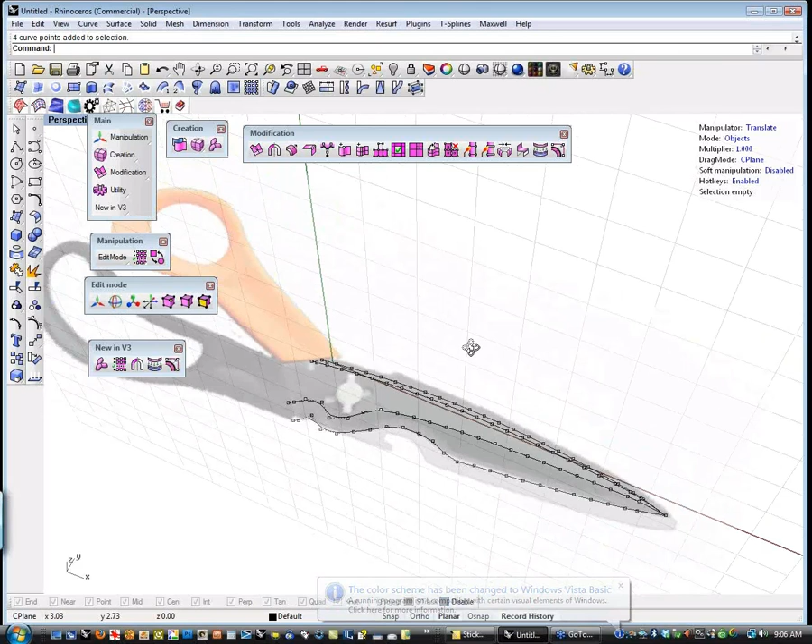Today I'm going to take a look at creating what could, with a traditional CAD system, be a fairly complicated model to make. It's a pair of sewing scissors.

Primarily I'm going to focus on the handles because that's where most of the organic stuff is going on. If we have some time at the end, I'll go into looking at the blades. I think we're going to try and pull this in right under an hour, Matt, so I'll keep an eye on the clock.

But I want to focus on the handles because I want to show you what I consider to be a really drop-dead simple workflow for creating stuff like this, that if you are a beginner just getting into 3D modeling for the first time, or if you're an experienced NURBS modeler getting into T-Splines, there's a little bit of a learning curve as far as the workflow and how to think about and plan a model like this.

There's a couple of interesting things in this model. The shape of these handles is, first of all, a very organic shape, continually blending. You'll notice there's a little area here that kind of rolls into this Y branch that then connects. Then we have a sharp edge down here, and the same thing around here. There's a little dip, and then a sharp edge around this, and then a little dimple sticking out here to keep the scissors from closing down on your palm.

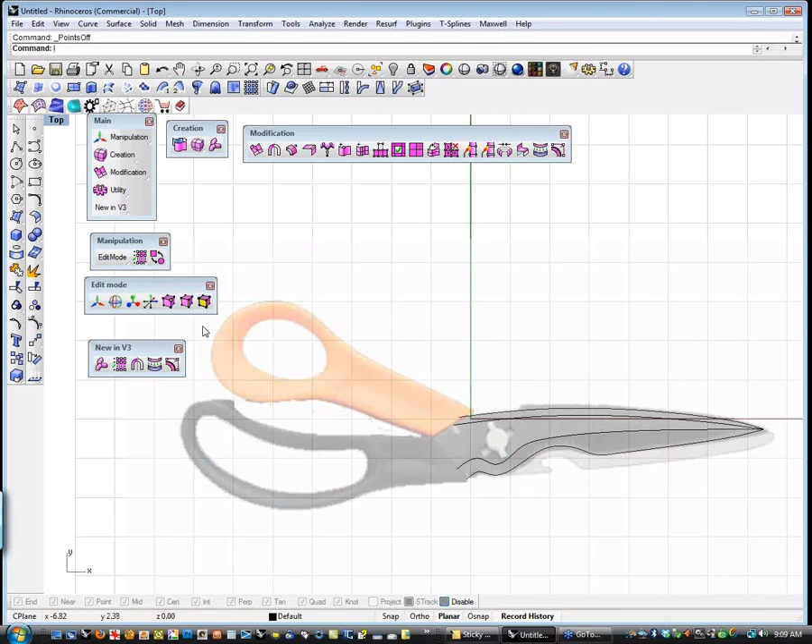But let's talk a little bit about how this model is going to lay out and the workflow behind it. Basically, I'm going to focus on the orange part right now and think about how this lays out, looking at the center line right through here. I want to have a little bit of detail over here and over here, and then I want this model to split apart and come around and join here, and split apart and come around and join here. So as I'm laying out my faces, I'm going to keep that in mind so I've got some options for adding this dent detail in here and how that wraps together.

If you've seen any of the other workflows or tutorials I've done, I've been calling this the append face workflow, and it's one of my favorite ways to work because it's absolutely positively dumb simple, with really powerful results, and it gets you up and flying without having to really know too much about the software. For me, when I evaluate a piece of software, I'm always like, how much can I do before I open the manual and start getting into this? With this workflow, you could start doing some really pretty awesome stuff really quickly with only about 3 or 4 tools.

Before we jump into that, I just want to go over the heads-up display and how the interface works and all that kind of stuff really quickly.

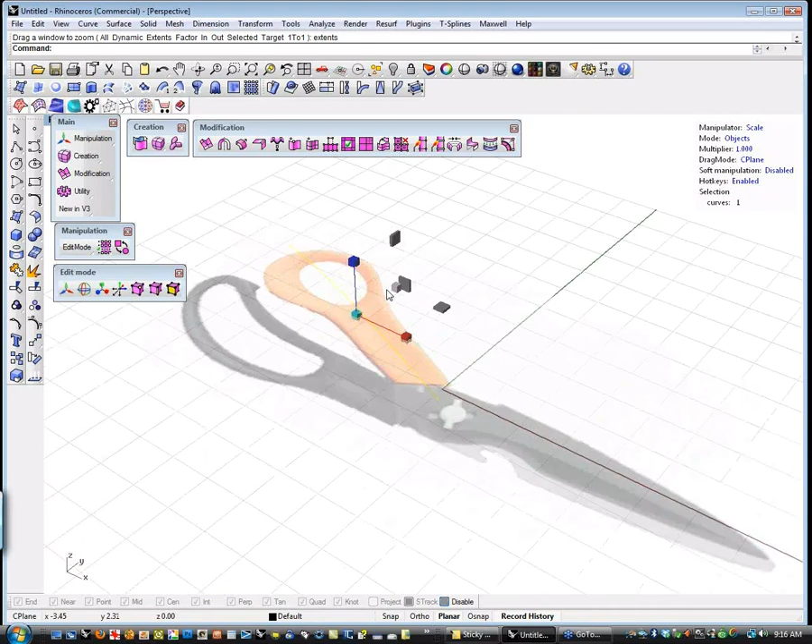You'll notice I have a 3D triad manipulator here, and I can pick which axis I'm manipulating, or I can manipulate in 2D just on the construction plane, or in 3D by grabbing the base icon there. One more click hides the manipulator.

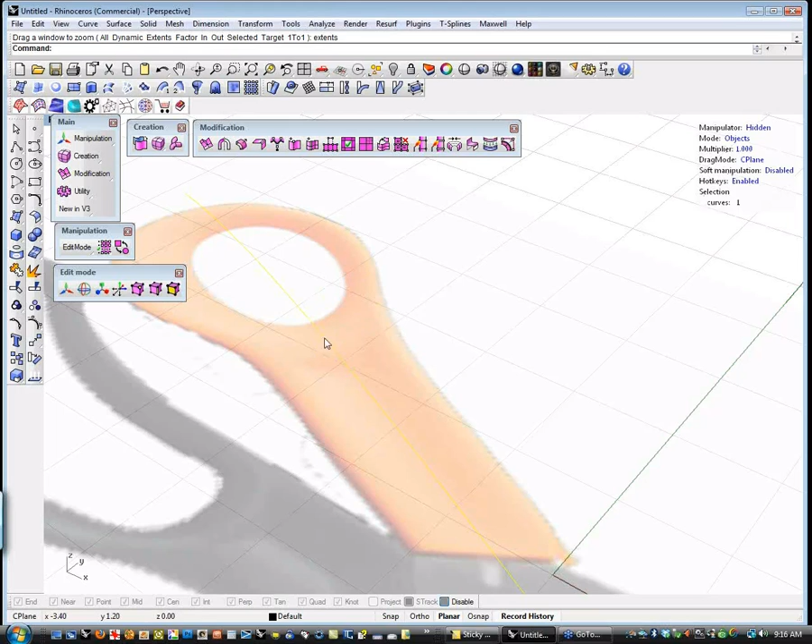Sometimes it's nice to get it out of the way if you don't want to deal with it, especially if you need to deal with something with a pointer or a selection. There are hotkeys for that.

If you look at your keyboard in the upper left-hand corner, you'll notice the Q, W, E, R, and T keys. Those are the hotkeys for translating through this. The Q hides it, the W gives you translate, the E gives you rotate, the R gives you scale, and the T key allows you to move the manipulator.

You'll notice when I hit the T key, the manipulator disappears and says pick a point. I'm going to move it down here, and that allows me to change where my manipulator is in the modeling window. Particularly effective for scaling and rotating.

Underneath that, we have the mode, and you can pick objects, verts, edges, or faces, just wanted to demonstrate how to access the different aspects of your T-Splines model. Those are also hotkey accessible by hitting A, S, D, or F keys - A being verts, S being edges, D being faces, and F being objects.

Underneath it, you'll notice there's a multiplier. What this does is adjust the feedback rate between the manipulator and the object.

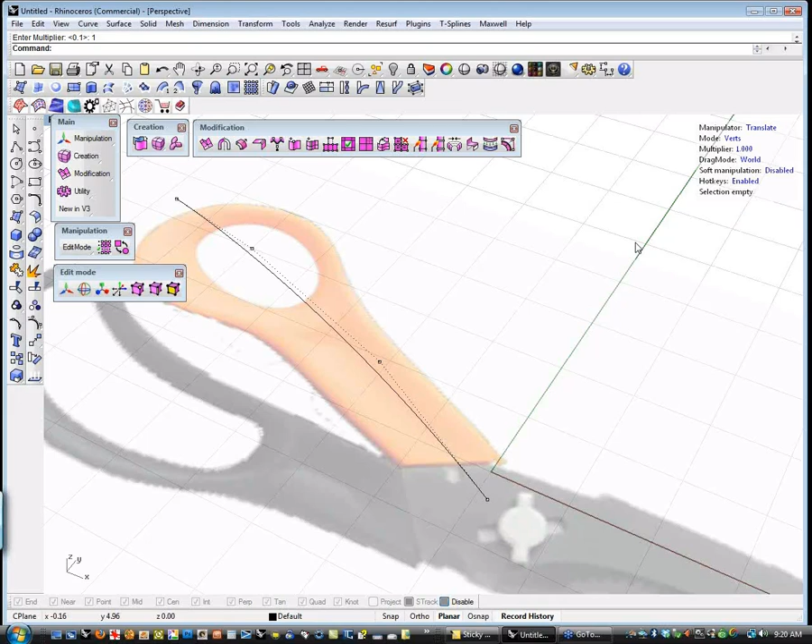So that's a little bit about the heads-up display, and that's primarily where most of your interface is going to come from when dealing with T-Splines, because there's a lot of make stuff and move stuff in this workflow. It's much more about picking a control point and moving it around, or picking an edge and moving it around, than a typical NURBS workflow where you're making an object, trimming a hole in it, building something off of it, and filleting it. This is a much more clay-like workflow.

So let's jump into this append face workflow, and let's look at how this works and what it does.

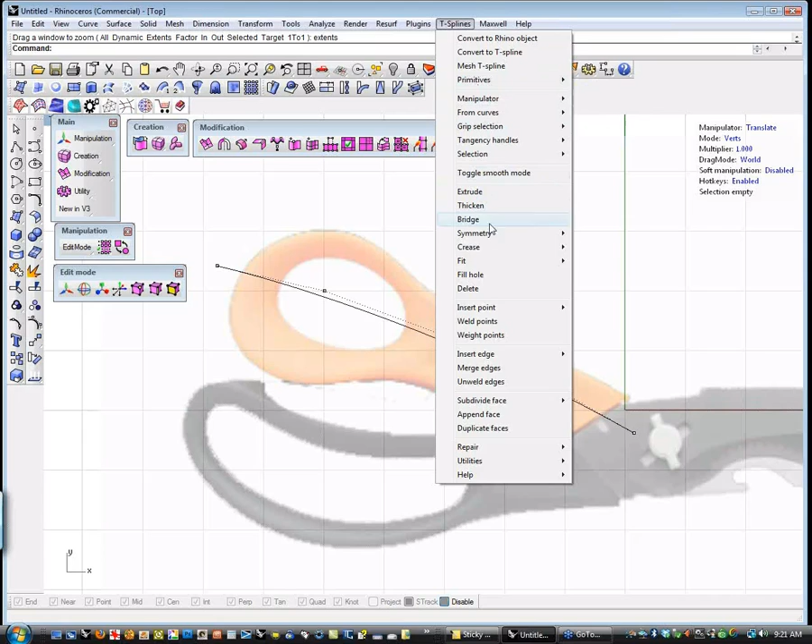What I'm going to do is start by making a single face using the append face tool, which is here, or in the... I never use these, here it is, down here. Basically it says point number 1, and I'm just going to make 4 points, dropping them in roughly where I want, respecting my center line. You'll notice that it made a face.

I can pick these edges, I can pick these verts since I'm in vert mode, and move it around to get basically what I want.

Then I'm going to go to edge mode, pick an edge, and hold down the Alt key. When I hold down Alt, it allows me to extrude an edge and make another face. The reason I want to do that is because I'm going to make a bunch of little patches and basically create this flat like a paper doll, then add some thickness to it and manipulate it to get my shape. So I'm going to hold down Alt over the C-plane manipulate icon here and drag out another face, and you'll notice it kind of updates as I go.

I'm just going to pull something in here, and pull another one up here.

Now I have to figure out how I'm going to get around this. I think I'm going to change into verts mode, grab a vert, and move this vert up here so that it's starting to turn the corner like that.

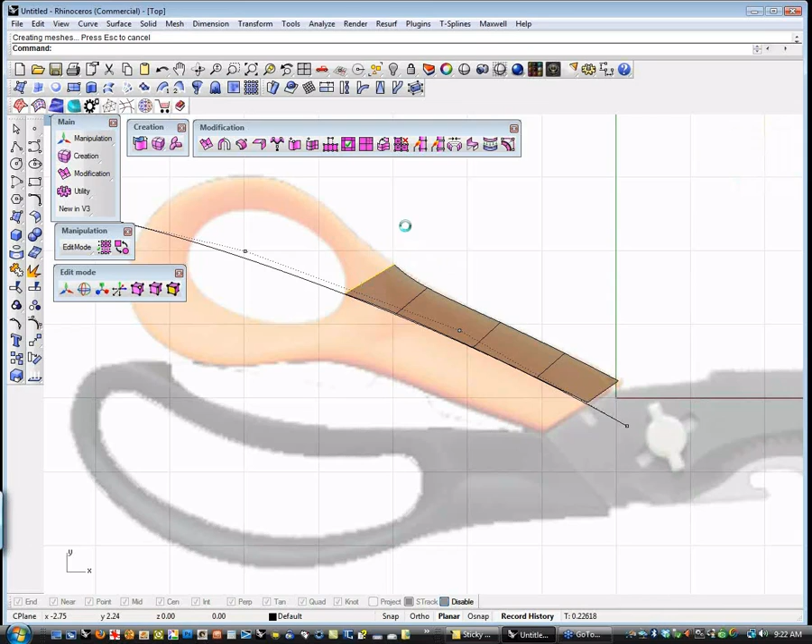I'm going to go back to edge mode and start pulling some more out of here. I'm not going to worry a lot about how this stuff is scaling or lining up right now, because it's all going to come together as I go. But I want to pay a little attention to how my flow layout is going, and you'll notice as I pull this next one up...

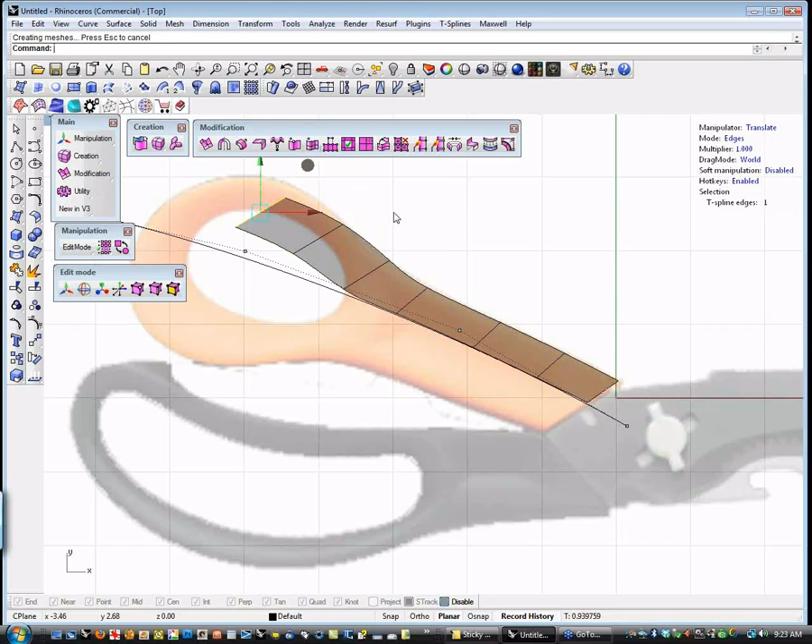Scoot down here a little bit. As I pull this next one up, I need to start going around the corner. So I'm going to go to my rotate manipulator by hitting the E key or clicking up here in the Heads-up Display. I'll turn this a bit so it's kind of radial, heading towards the center, then go back to my translate icon by hitting the W key.

Then maybe at this point I want to get into my verts and start getting more of a feel for the thinness of this part. Again, I'm not worried a lot about this transition right now, that's kind of janky, but we're going to fix it. Maybe pull out another one here.

Again, I want to get this to start turning the corner, so I'll hit the E key or click up in my Heads-up Display to get my rotate. I'll turn this here, go to W, Alt drag again, and go to my E key hotkey or click the manipulator up here again to allow it to rotate. That's kind of half my model right now.

The beautiful thing about this workflow is once you have your basic paper doll laid out, you're like 90% of the way there. So I'm just going to do some quick adjustments here using the translate manipulator. Again, I'm not going to worry a lot about this because it's going to change once we weld it to the other side.

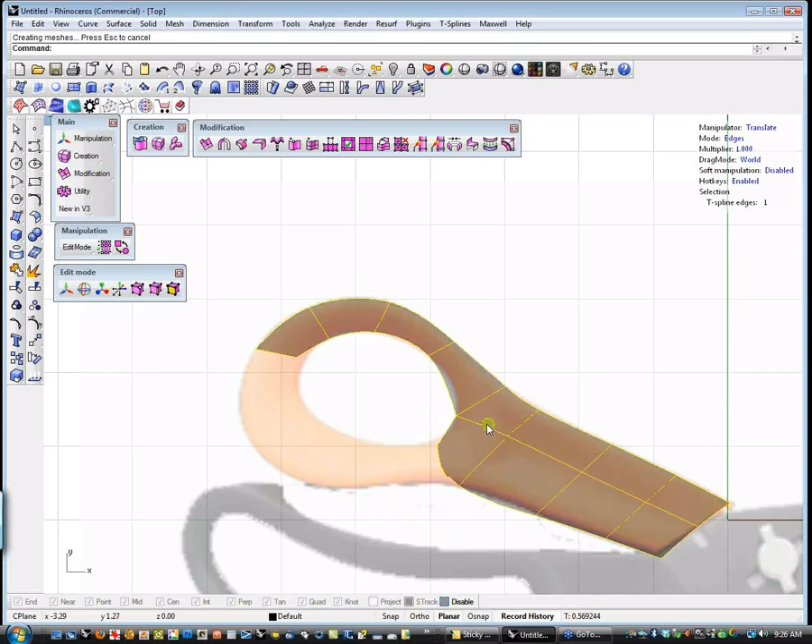So again, I'm going to turn this a little bit to get it to go around the corner. Instead of just going straight off of this, I'm going to leave this patch here, and then extrude off of this edge. So I'm going to alt drag off of this edge, and you'll notice another crease just showed up, but that's okay. I'm going to keep going around the corner.

Rotate this a little bit. Rotate again. Rotate again. I'm just toggling back and forth between the W and E key on the keyboard to access the different modes here, and you can see how quickly that goes.

So I've got my basic layout. I'm going to adjust this really quickly to allow it to follow the shape. You'll notice you're starting to get a feel for this gooey, clay-like feel where you can just pull stuff around and start seeing shapes develop.

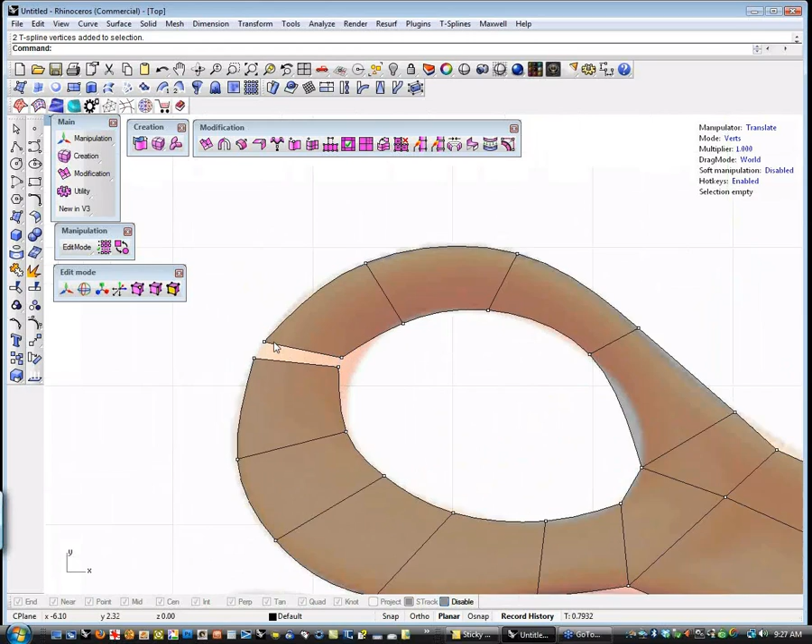So the last thing I need to do is close this gap. I'm going to pick these two verts and go to the weld button in the toolbar. There's a cool thing about the weld key—Z is the hotkey for that, by the way. So you can either hit the weld button here or hit the Z key once you have it selected. I'm going to use the Z key because it's quick.

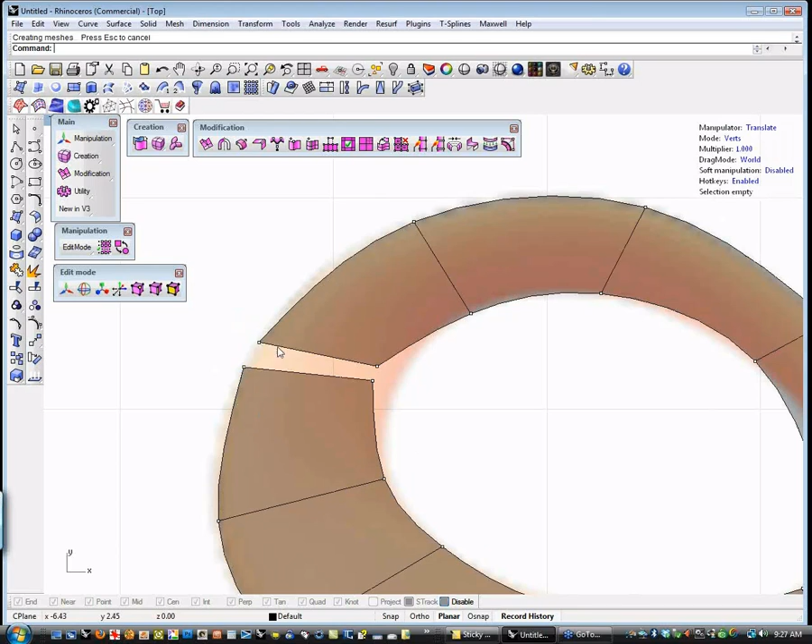If I pick one, hit the Z key or the weld button, and pick the other, you'll notice the first one jumped to the second. If I pick this one and hit the weld key, that one jumps to that one. If I pick them both and hit the weld button, you'll notice they jump together and average. That's pretty much what I want.

So I'm going to pick both of these, let them jump together and average. You'll notice what happened is this model switched to box mode, which we'll get into a little bit as we go through this. But that's okay—it's not broken, it had an issue in here.

If you notice when I went—let me go back—you'll notice the reason it switched to box mode, you see this red point here? That's saying there's a singular point that doesn't have any way to interpolate in any other direction, and so it can't resolve the model in smooth mode, so it switches to box mode to allow you an easier time diagnosing what's going on.

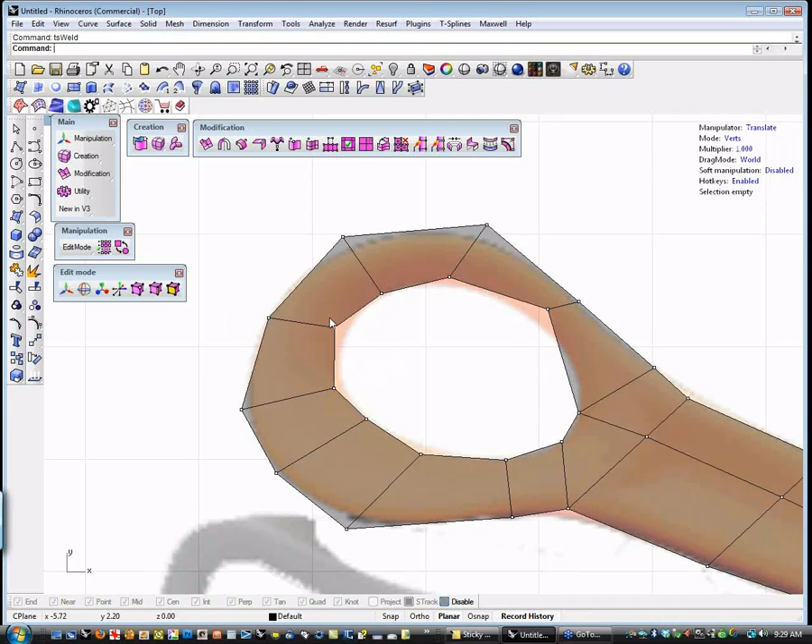In this case, all I had to do was weld this, and you notice the red disappears. The model's closed up, and at this point, if I hit the tab key to toggle smooth, it should toggle smooth on me, which it did.

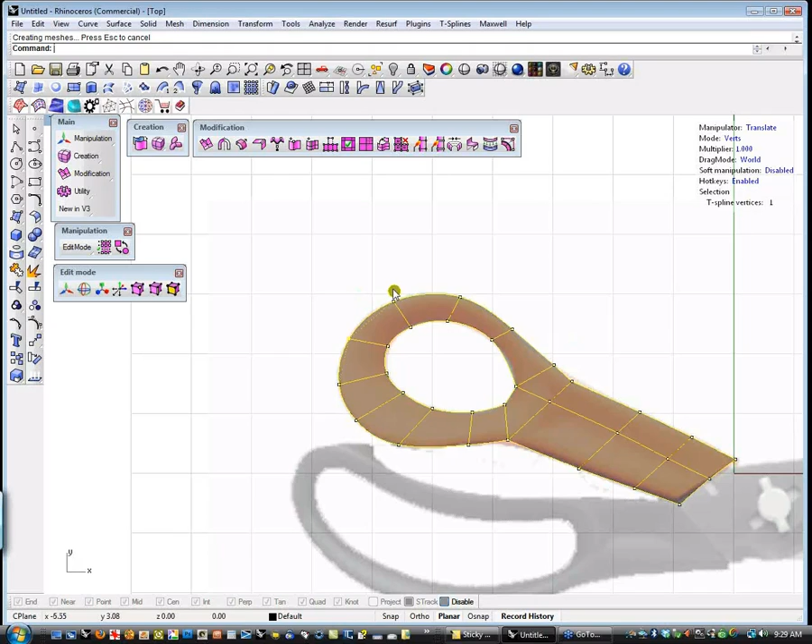Now I still have a little bit of a crease down here, which is okay, because that's going to go away as soon as I thicken this. A little bit of this, as you're learning, when you look at this stuff you think, oh man, this thing's broken. It kind of feels that way when you're first getting started, but that's not the case—you just need to keep plowing ahead.

So let's go to perspective view, and let's add a little bit of thickness to this thing. Basically what I'm going to do is use the thicken tool, and I'll do this in object mode, although I don't think it's necessary. I'm going to pick this, select the T-Splines to thicken, press enter when done. I'm going to right click, and just drag some thickness to this thing.

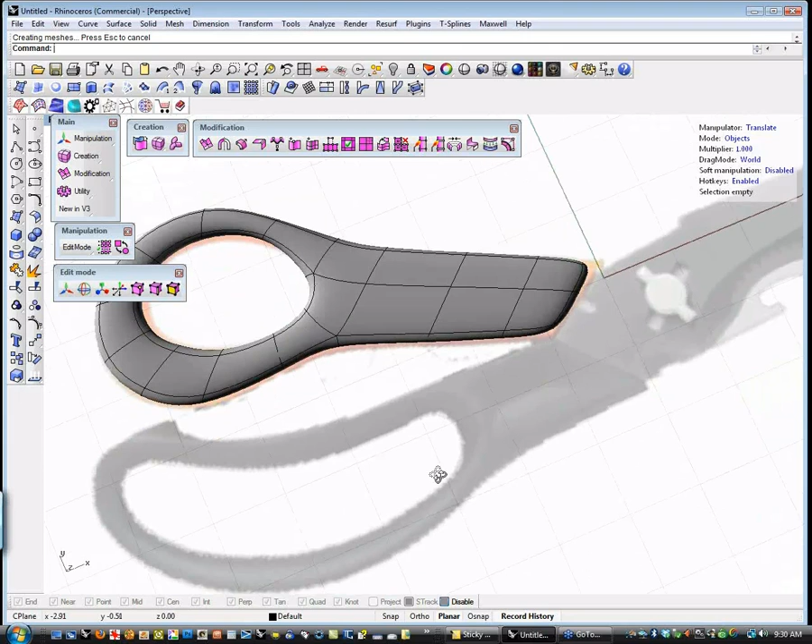And you'll notice that I get a nice smooth piece. We just laid out a paper doll and thickened it. So now let's get into this a little bit and start making our details. The other thing you'll notice is that crease disappeared, because now it has thickness and can resolve in three directions instead of only two. If it can only resolve in two directions, you're going to get a crease.

So let's get in a little bit and we'll start picking edges. I'm going to just pick an edge, and adjust the shape of this real quick. You get a feel for how, if I had to adjust this model at a later date to fit somebody, how easy this would be, because as I move this thing around, everything around it adjusts.

So all your curves and fillets and blends and all that kind of stuff that you typically would have to build in NURBS, you kind of get those for free here. And if you have to adjust them at a later date, they all update and adjust instead of blowing apart, which is usually what they do.

So I'm just going to move this in real quickly like that. Okay, nothing complicated here right now. I might change this rotation on this just a hair, just to get it a little bit more aiming where I want it. Same thing here.

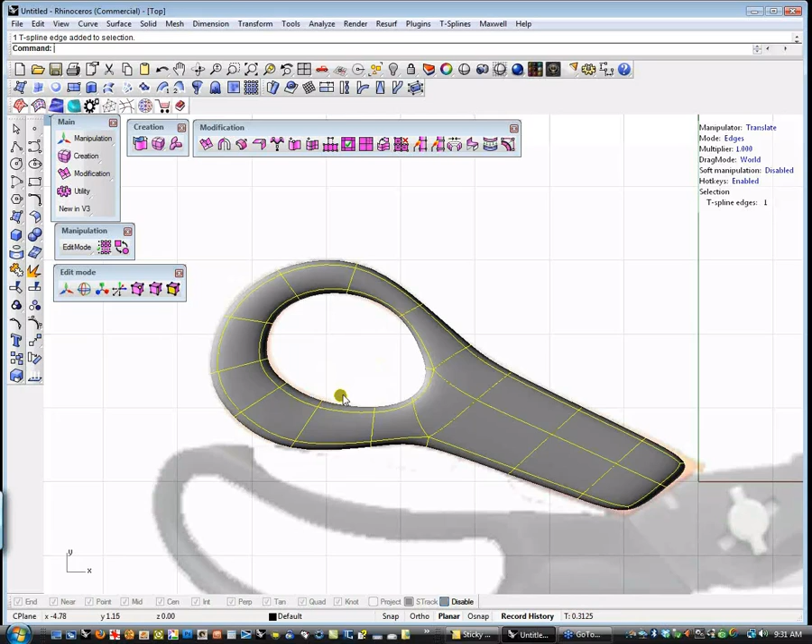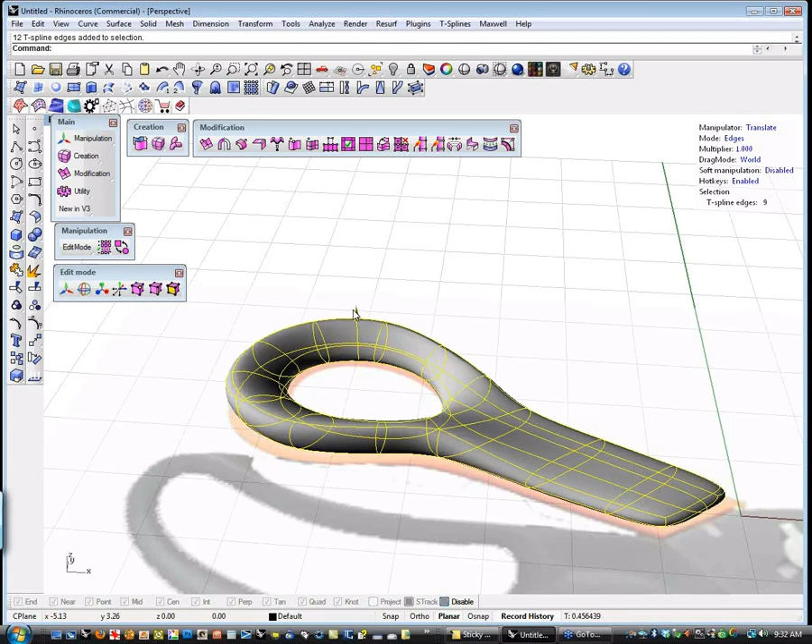So I'm going to control drag and deselect all of those, and I'm just going to use my manipulator and pull this up. And you can see how the shape starts to develop, almost like magic.

And a little bit of a wonky transition right there, so I'm going to go to my vert, and pull that down to make the transition a little nicer. Same thing over here. I'm going to adjust this transition a little bit, make that be a little smoother so that it doesn't dig into your thumb.

And you'll notice that it's really kind of almost there. If you imagine sticking a thumb through that, you could see how it would fit right in there nicely.

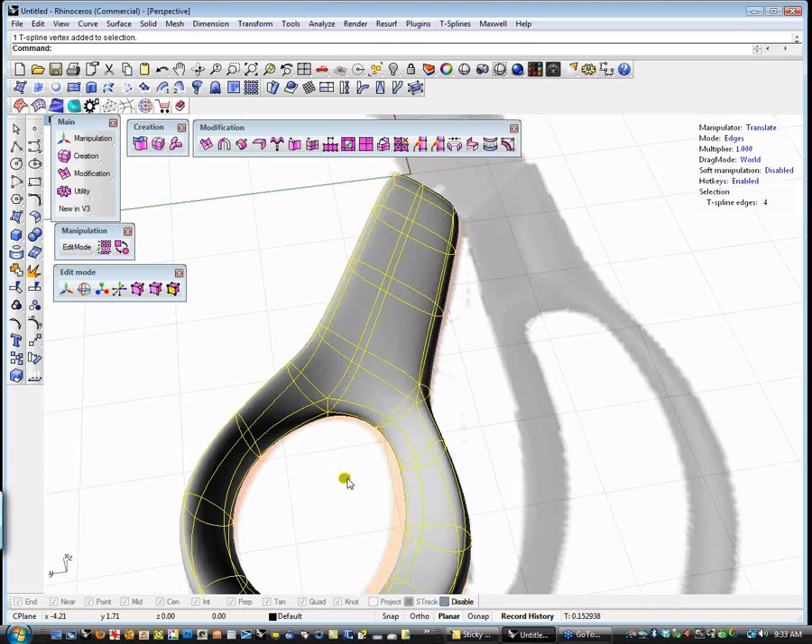And so let's go in and adjust this just a little further. I'm going to grab these in here, and push this shape over a little bit. And you'll notice that as I push that internal edge, this one sharpened up a little bit because they got closer, and that's fine. That's kind of what I was going for.

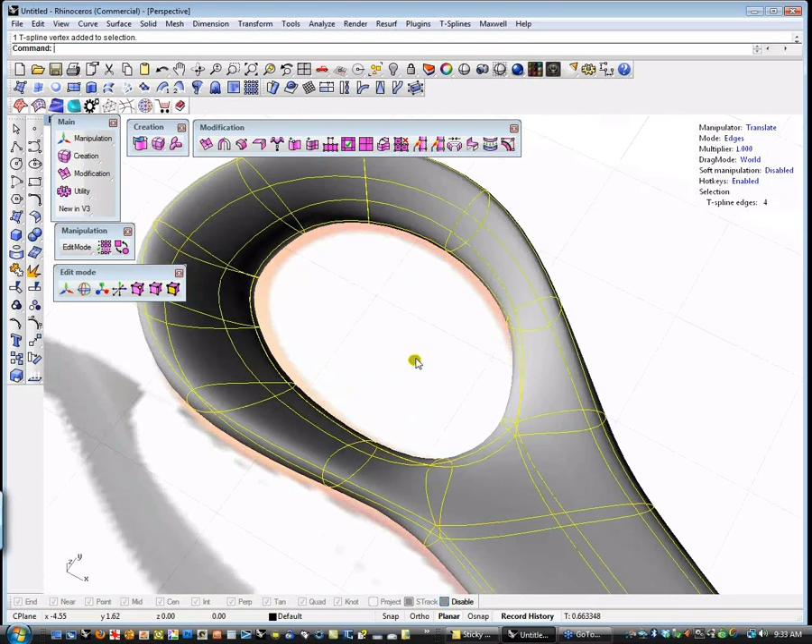But this one moved, so I'm just going to grab it, and use my construction plane manipulator here and just pull it back. And you can see how quickly that starts to develop.

Now this is still a little doughy, and I'd like to sharpen this up. And the back side of this, as your thumb comes through there, you can imagine sticking your thumb through. You wouldn't want this to be that kind of shape. You would want this to have a little bit of rise to it so that your thumb goes in there nicely.

So we're just going to pull that in, and maybe we'll grab some verts here just to make that transition a little smoother.

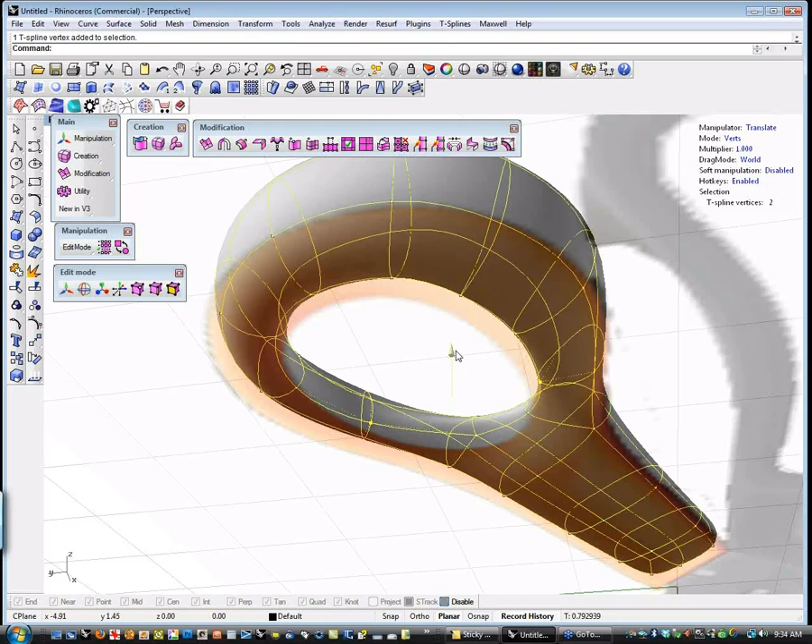But you can see how the shape is adjusting as I do this. Let me throw a better shader on this.

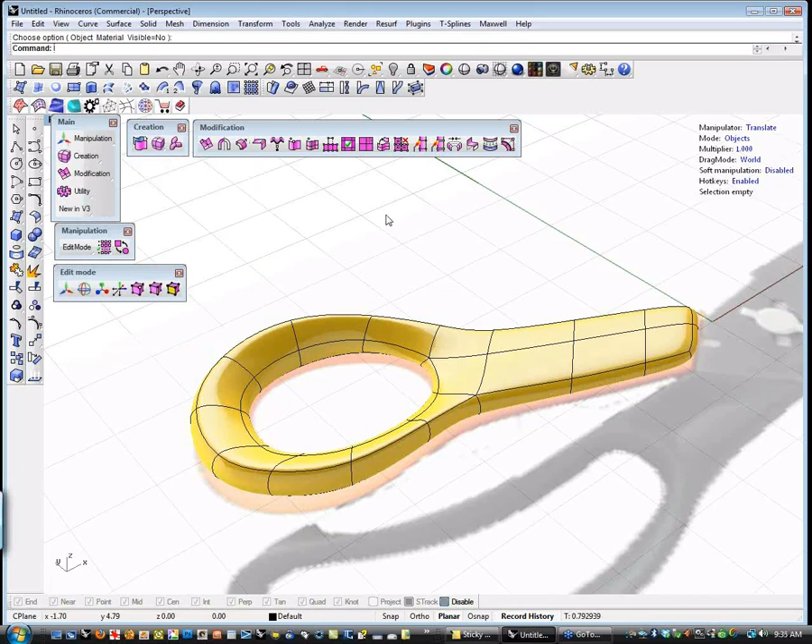So you can notice what's happening here, you can see how gorgeous this has started to develop, and we can mess around with this in real time. If we were chasing highlights, we could mess around with this in real time and watch the highlights go. But for this case, it would be something that we would want to fit somebody.

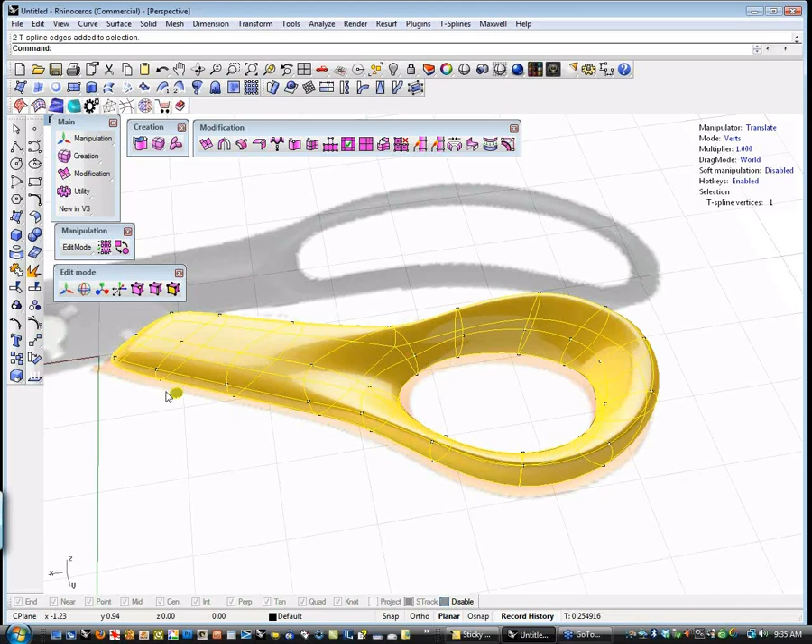So you can grab a point and start moving this around and get a feel for how this thing is going to fit a hand. Obviously, if we had a hand buck or something like that, we'd throw it in there.

But look at this transition. Look at this absolutely gorgeous transition in and out of there with almost no effort whatsoever. Don't tell my clients how easy this is to do.

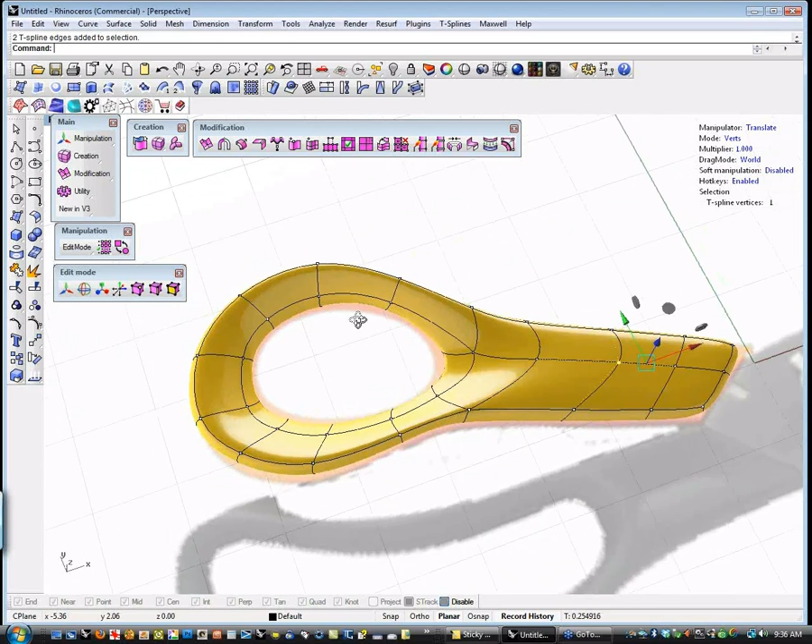And you can very quickly start to kind of get the feel for how this thing would come together.

So let's sharpen this edge up a little bit because this is a little doughy back here. And the other thing is maybe I want to cave this in a little bit.

So what I'm going to do is pick this edge and double click on it. It's going to run too far, so I'm going to back off just a little bit so that I have that outside edge selected. Then I'm going to insert an edge by using the Insert Edge Simple, left-clicking on this button here.

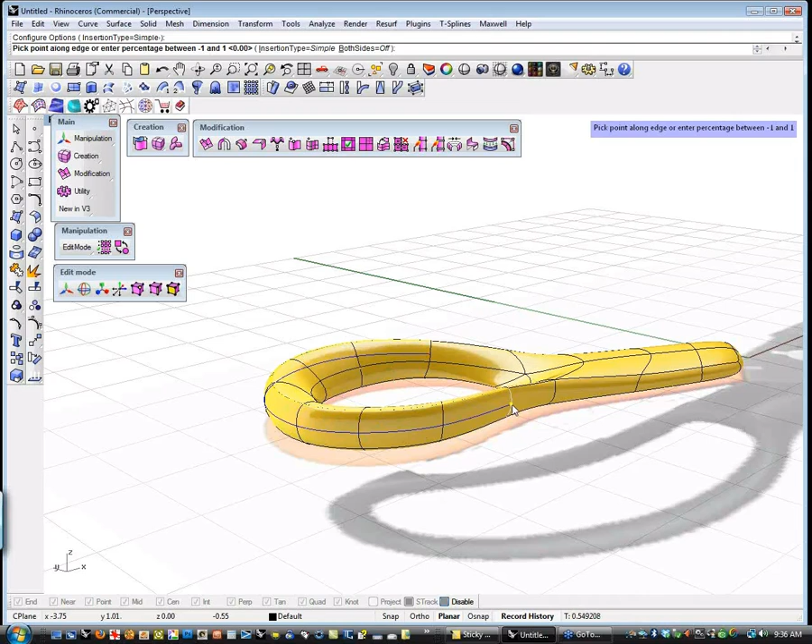And I'm just going to drag an edge in here. You'll notice that what's happening down here is it's actually stopping, not running through the model, which is okay because it's T-Splines, and T-Splines is good like that. So I can just throw an edge in here.

You'll notice that it'll update. This sharpens up a little bit because there's more information there. And now I have more stuff that I can play with.

And if I wanted to, say, tuck this in, I can do that. And maybe I'll pull it down a little bit because it sharpened that top edge a little.

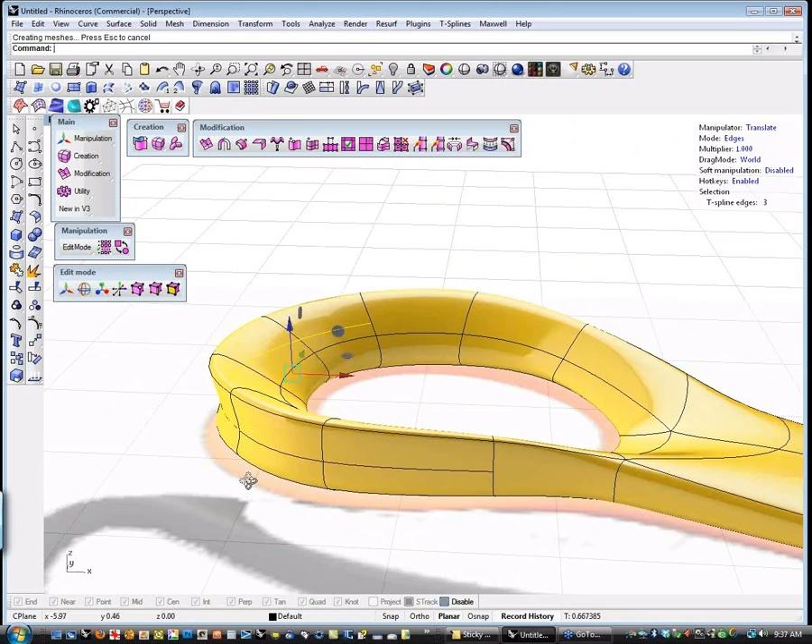But you'll notice that by allowing that detail to tee off, it allows me to add localized detail in here and get a really nice crisp edge around here, but it blends out and flows nicely into this softer edge through here, which is cool. That's what I wanted.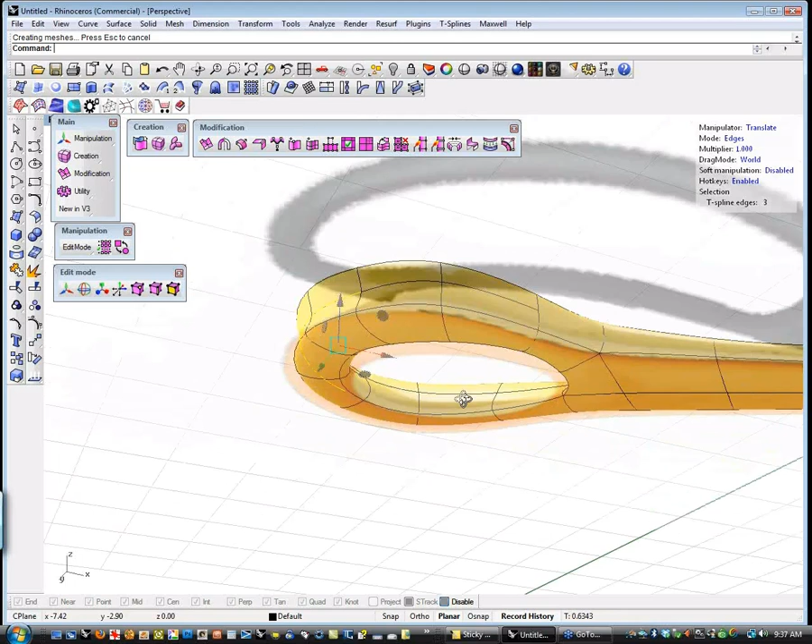Now let's deal a little bit with this backside in here. This is a little bit of a doughy transition here. So let's go ahead and pick this edge.

I can either double click it or pick a single edge and hit the L key, which selects the edge loop. I'm going to back this one off and insert another edge here.

And you'll notice two things will happen. This will sharpen up here, and it gives me the ability to start manipulating the back here.

And very quickly, in about 13 or 14 minutes, we've got this really fantastic shape that's watertight, bomb-proof, and ready to roll.

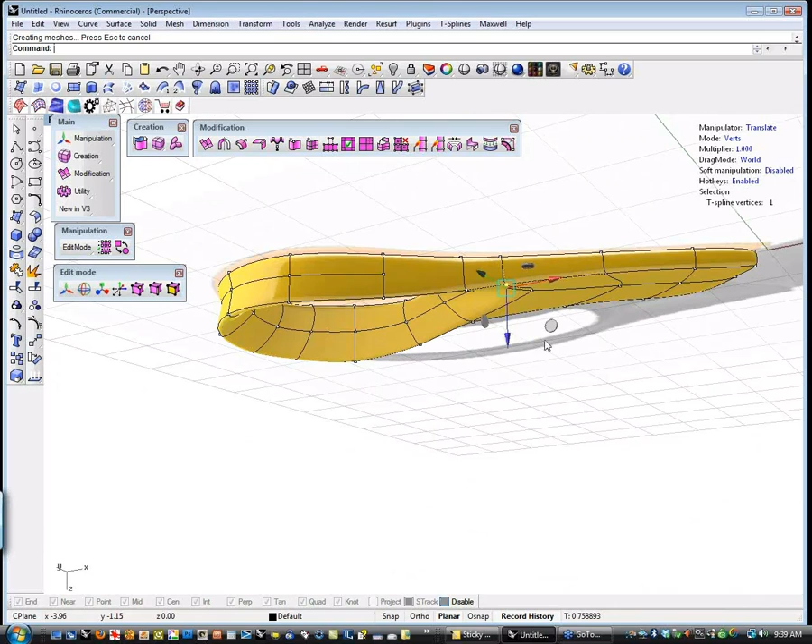It needs an adjustment right there. Sorry. I always run the risk of overindulging my designer geek on these things, so if I space out for a minute and just start making shapes, tell Matt to ping me.

All right, so let's go to the top view again and take a look at how we're doing with our reference image. I have plenty of information in here now, so the last thing I need to do is come in here really quickly and adjust this shape a little bit.

And you'll see it all updates really nicely. Now you can imagine how easy it would be if you were in a situation where you didn't RP part of this, and like the stupid kitchen scissors I have in my kitchen right now that fit my wife's thumb perfectly but stick to mine, like kindergarten scissors, needed to adjust it, all you need to do is come in here, grab this edge, scale it out a little bit, and you'd have a better fit for a big gorilla hand like mine.

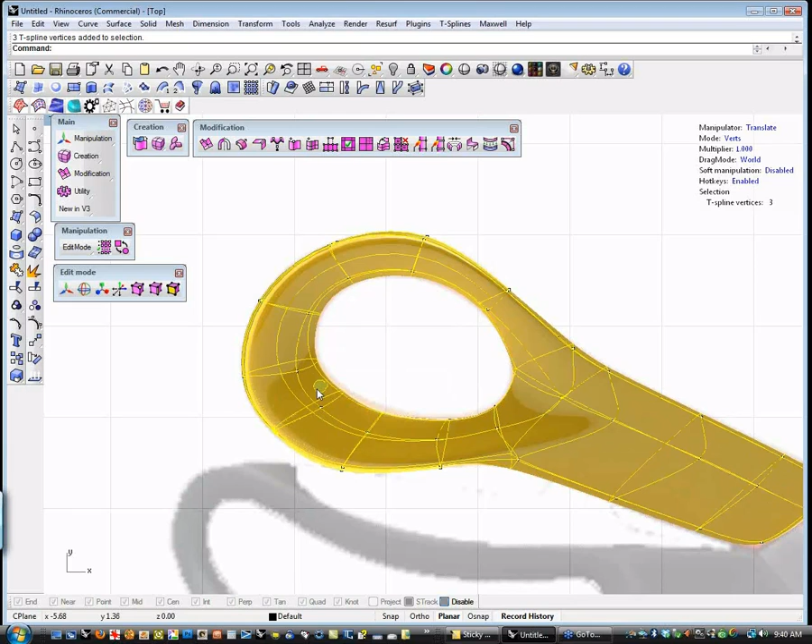All right, so we already built one side, and we have plenty of time, so let's go ahead and do this with the other side.

Kyle, before you start this, one question that came in: if you wanted to start out by using curves in Rhino, is there any way that you could do that?

Yeah, I mean, you could. I think for this webinar I like to focus on something that's cinder block simple that you could get away with, and this to me is probably the simplest way to approach that. If you wanted to work from curves, what I would probably do is lay out a curve from here to here, a curve from here to here, and a curve from here to here, and then either use the loft command...

...loft it in Rhino and convert it to T-splines, and then I'd probably do 3 curves through here and lay them out in space, and again either loft them in Rhino and convert it, then weld them here and here. We can do that for the second one. You want me to do that for the second one?

Good. I mean, I guess the other way to work from a curve is to just extrude the curve. So if you had that like on the inside of the handle and then just extruded it outwards.

Yeah, the only issue with that is if your curve is not set up correctly to start with, you can get into situations where you've got a million points on one curve and not enough on the other, and welding that stuff together can be a little bit of an issue. But let's do that for this one. Matt has thrown down the gauntlet here, so let's do it.

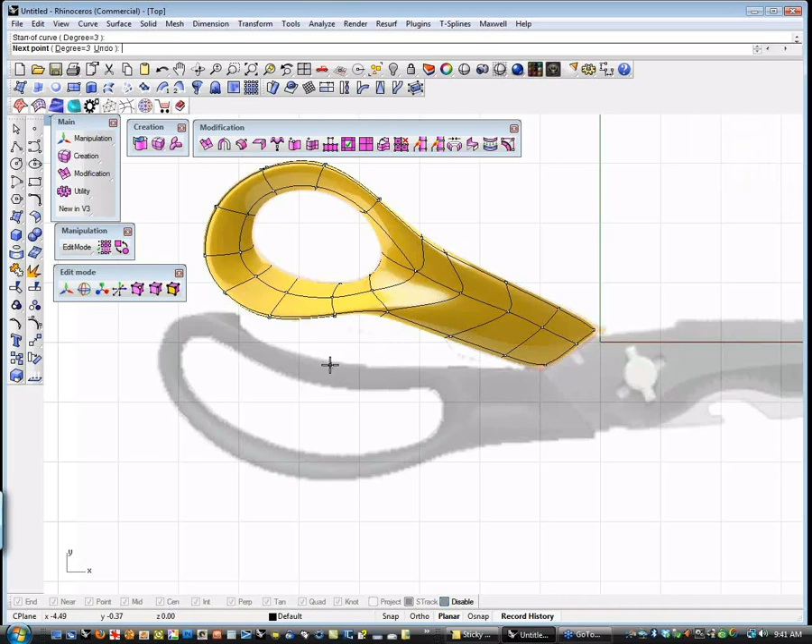So we're going to start with just a regular curve. At least he didn't take my hotkeys away this time. All right, and I'm going to clean this curve up a little bit because it's really nasty.

Again, the T-Spline's manipulator works on the curve, so I can pick just regular CV points and move them around.

The way we're going to build this one is I'm going to extrude the curve to get a ring of edge, and then thicken that curve just like we did over here, so I'll have essentially a torus or a donut that's kind of this weird hot dog shape. Then I'll extrude some faces off the edge to get this. So this will be a little bit different workflow, but it's still a really simple way to go.

The first thing I'm going to do, just out of habit's sake, is pick this curve and use the Rhino rebuild function. It's got 25 points in it right now, and I'm going to try and reduce that a little bit.

If you notice, I can go to 15 points and I still get a really good... oh, actually I take that back, let's go the other direction. Duh. All right, so I'm gonna just rebuild it at 15 points.

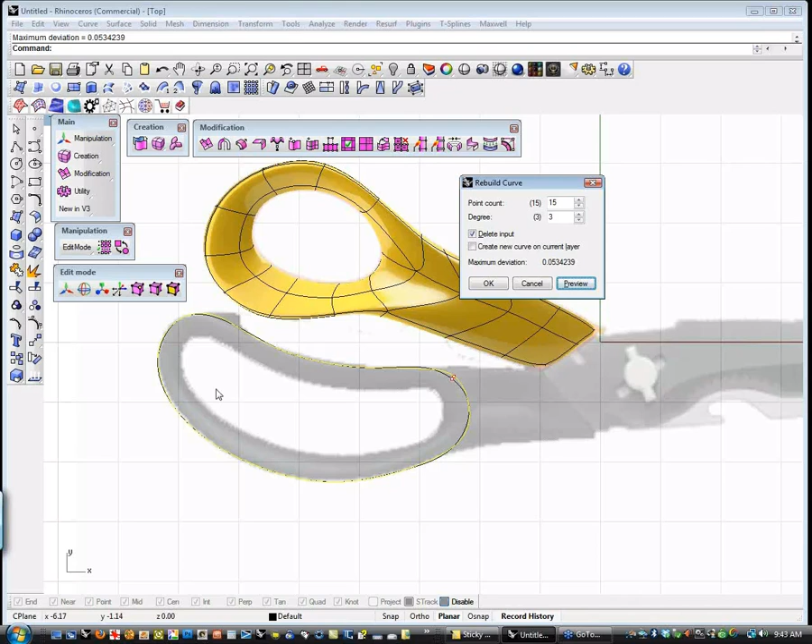You'll notice it pulled a little bit down here, but that's okay. I'm going to accept that, and if I look at my point structure now, it's a lot more even and a little bit better laid out than the way I did it. So then I'm going to come in here just really quickly and adjust a little bit of shape. Everything else looks all right.

Okay, so I'm going to pick this, control spacebar to get my hotkey up. In this case, instead of alt dragging on the translate, I'm going to alt drag on the scale, right in the center here because it's a 2D object anyways. And if I alt drag on the scale, you'll notice that it pulls a ring of edges out.

And I have a surface there. So now all I need to do is come in here and very quickly hit the W key, go to the translate manipulator, and move these around.

One note: if you move that pivot point of the scale manipulator, it can probably scale a little bit better towards the center. Yeah, it definitely would have.

So this keeps you from having to chase them around. The reason I do this—I don't want to bash this as a workflow—I actually do this fairly frequently.

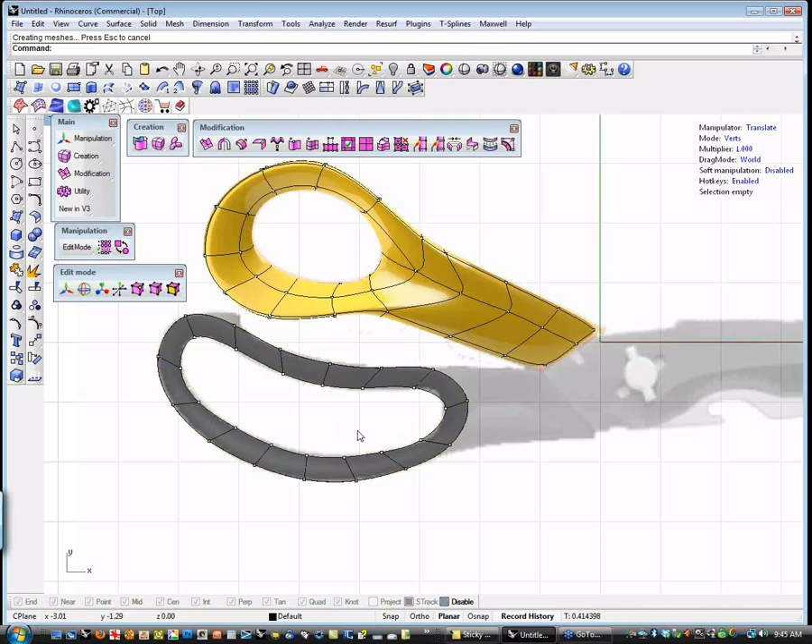But if I'm searching for something and I don't really know how the thing is going to lay out, I find that if I use that kind of append face, it forces me to think about how the thing is going to lay out and how everything is going to flow together. Sometimes it can help me if I'm searching for an object or a shape, and it can help me lay it out a little cleaner than if I tried to go with curves.

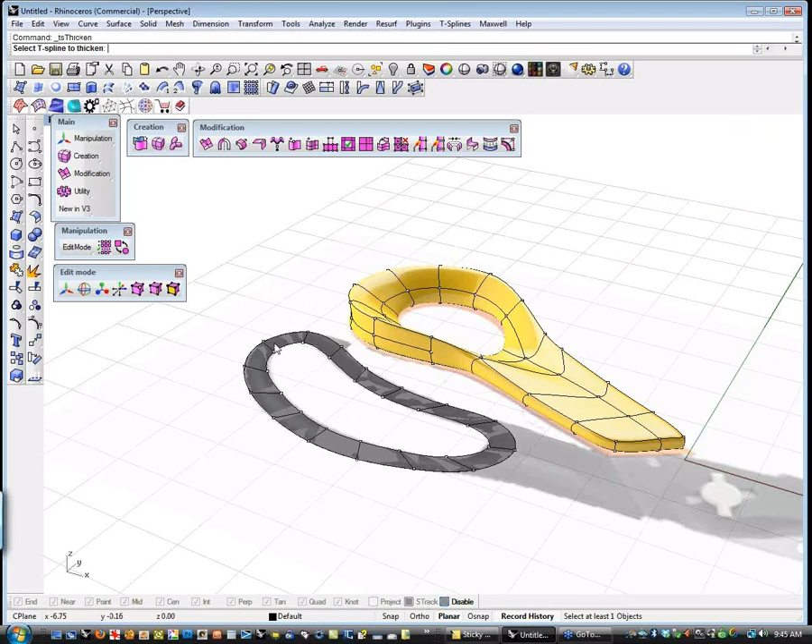I tend to make a mess with curves, so I try and do it as simple as I possibly can. Same thing, I have my faces laid out here. I'm going to pick this, I'm going to thicken.

I'm going to drag up a little bit and accept it, and I'm going to get this nice torus shape. And so then I need to add this extension out here. So I'm going to pick this face and this face, and just like we did with the curve or with the faces, I'm going to alt drag on the C-plane icon.

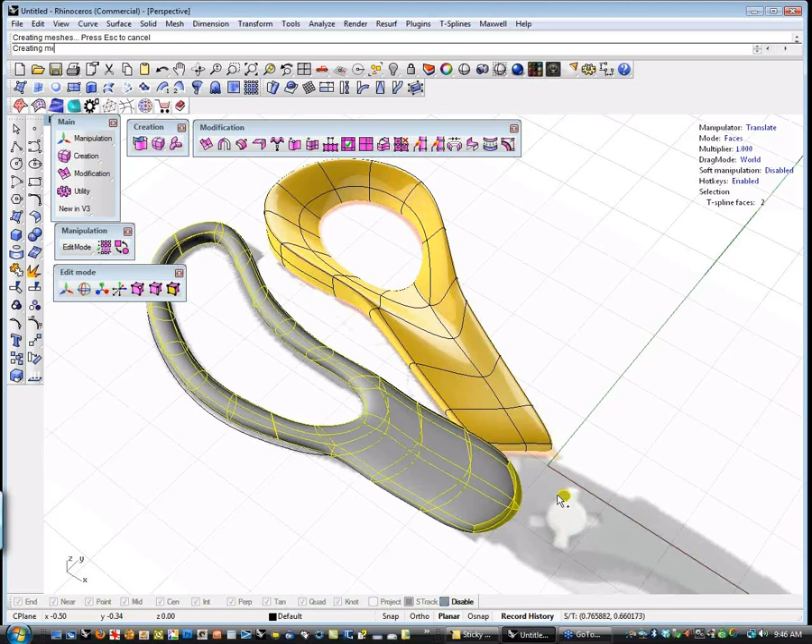And I'm going to drag maybe one more, like that. And if I go to my top view, grab some edges. And this one I'm going to scale it. I'm going to hit my T key, move my manipulator, and I'm going to scale it from here. You'll notice that allows me to flatten out that edge a little bit to match my reference a little more closely.

Look at that. Any questions on that? You guys like that one better, or you like the other one?

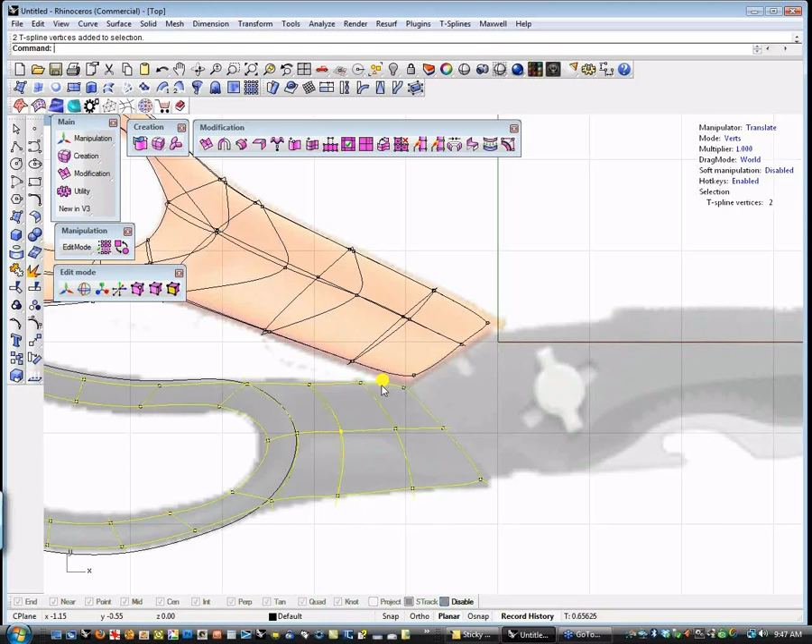All right, so let's add this little appendage down here, and then we'll pretty much have the basics of this model. We can go in and adjust it.

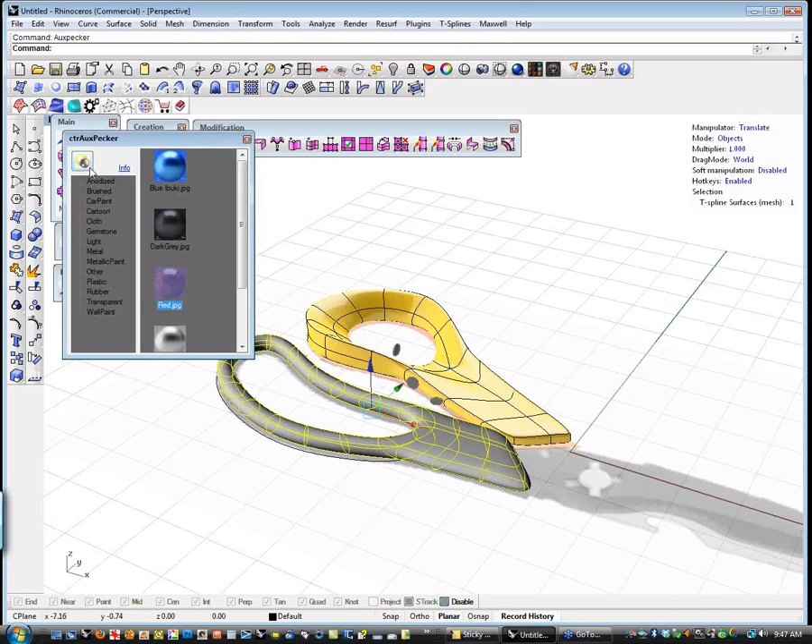Let me shade this again so you can see it. Let me put a better shader on here. If you're using this plugin, by the way, you have to pick object before you assign it, otherwise it won't assign. And I'm just going to lock this one for right now.

So we need to add this little appendage sticking out of here. So I'm just going to grab this face by hitting the D key or clicking up here through the manipulator. I'm going to pick that. I'm going to just alt drag. You'll see that it just adds another little piece of detail out there.

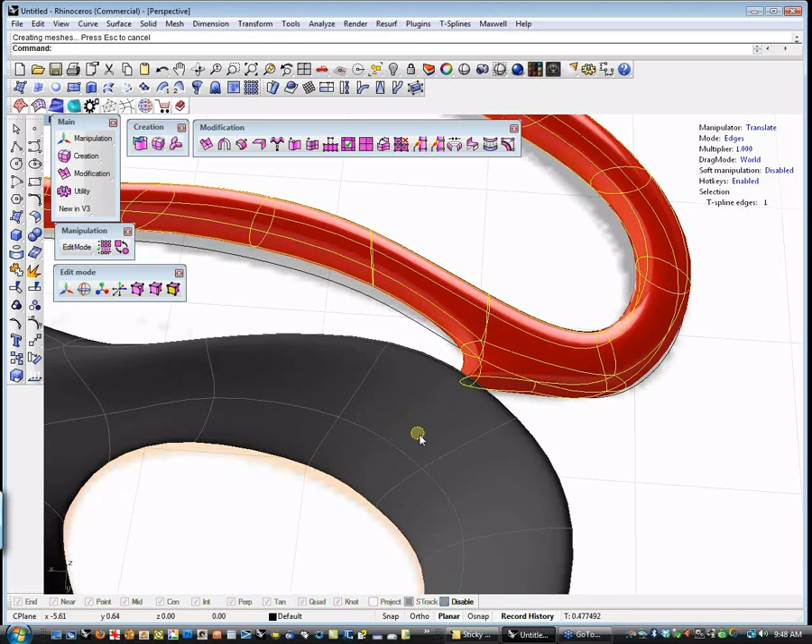All I have to do is go into my edges and adjust the shape of that. You can see how convenient the 3D gumball is as far as doing this kind of stuff.

And for the most part, I think we're in good shape on that. May just do a few little adjustments. You notice as you make these adjustments how smoothly it goes in and out of the geometry around it.

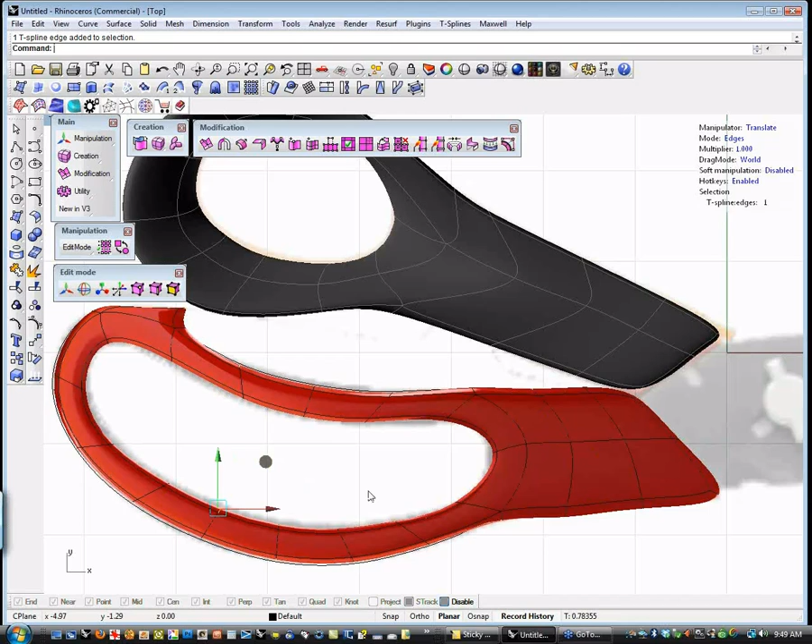All right, let's sharpen up the edge of that handle a little bit. I'm going to double click on this edge, or hit the L key, and I'm going to pull this down just a little bit. And I'm going to double click on that edge.

I'm going to shut that one off and those two so that I'm just moving it here. I'm going to give that a little bit of a pull right there. I want to drop these a little bit.

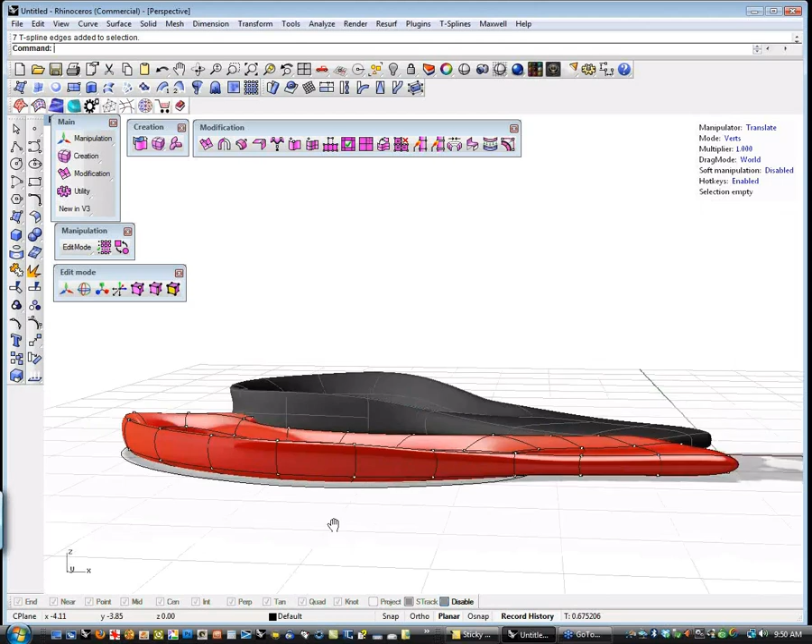Let's add an edge ring down here to sharpen the edge of this internal thing up a little bit. So I'm going to insert edge simple and drag out probably about there and drop it. And you'll notice that this edge just sharpened up a bunch.

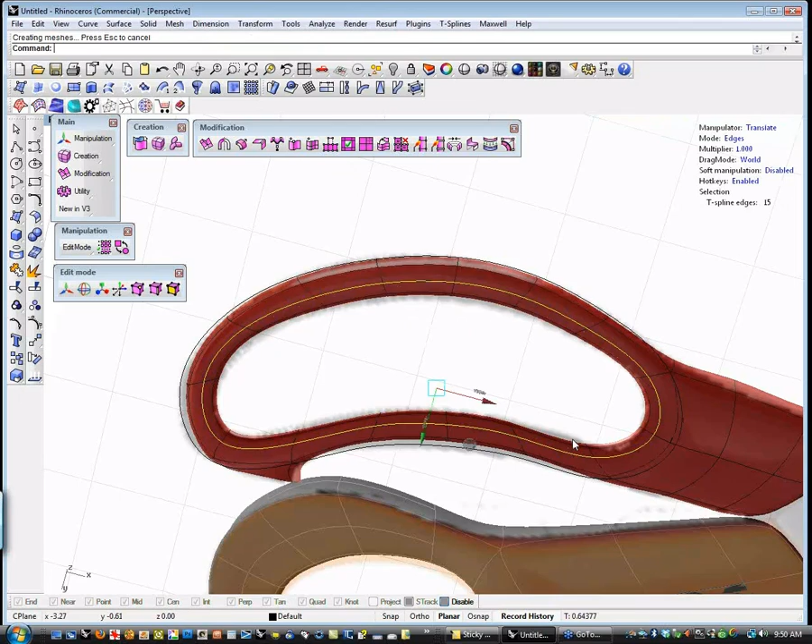And maybe we'll tighten this up in here. Again, I don't want to kill you guys watching me design this thing on the fly, but I just want to show you that it can be done. The thing that I like about this is that a lot of software, as you're working, forces you to put on this hat of, okay, I'm a CAD model maker.

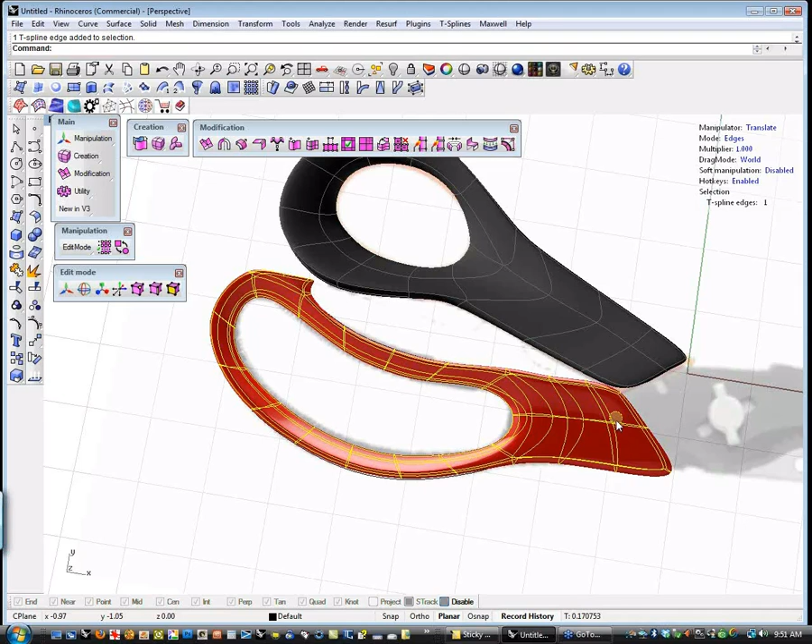And I have a drawing, and I'm trying to match my drawing, and I need to match this curve, and I need to match that curve, and I need to make sure that all this stuff matches my drawing. Well, the problem with a 2D drawing is 99% of the time they're wrong. They don't line up, they don't look good, they have magical shapes that are absolutely impossible to create in 3D. You get things that don't line up and projections that don't match and all that kind of crazy stuff. Anybody who's tried to match a drawing is familiar with that scenario.

The thing that I like about T-splines is the fact that you can start with almost nothing as far as reference is concerned.

You notice on both of these - this is just something I grabbed off the web as a basic reference - you have enough freedom that you can actually design in 3D instead of just trying to make a model. You can actually come in and make design decisions about how the thing looks. You say, well, maybe this thing would be cool if it had a little kink in it here, or maybe a little thumb rest or something like that.

Especially if you have access to an RP printer at a company, you can try this stuff. You can say, well, how's that thumb rest feel? How does it feel if it's out like this? How does it feel if it's up like this? How does it feel if it's down like there?

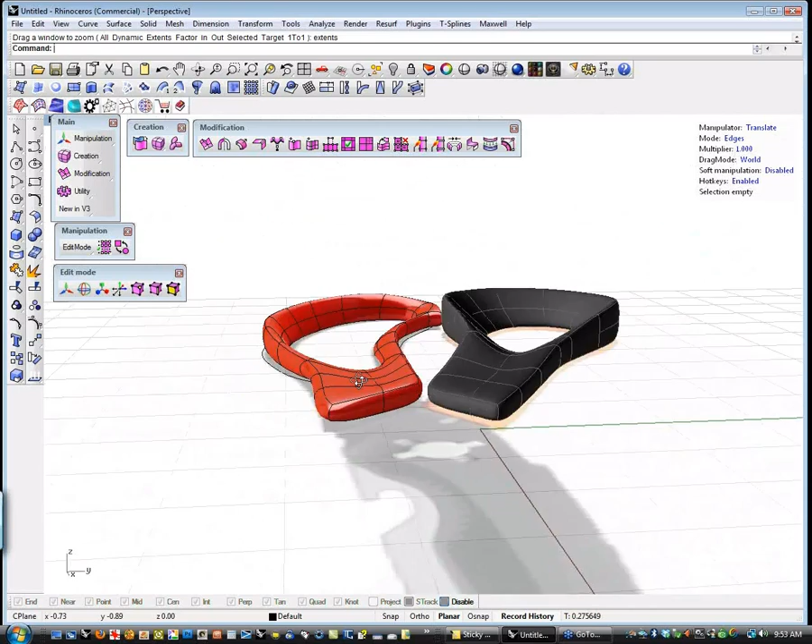And in about as fast as you can hit save as, you can create iterations that allow you to create stuff that quite possibly could end up being better than what you would have come up with if you had just tried to match your sketch, because matching sketches is hard and dragging T-spline stuff around is easy. So it's a really cool way to work, because you're making your decisions in 3D, which is where your decisions should be made anyways, because that's where it either does or does not work.

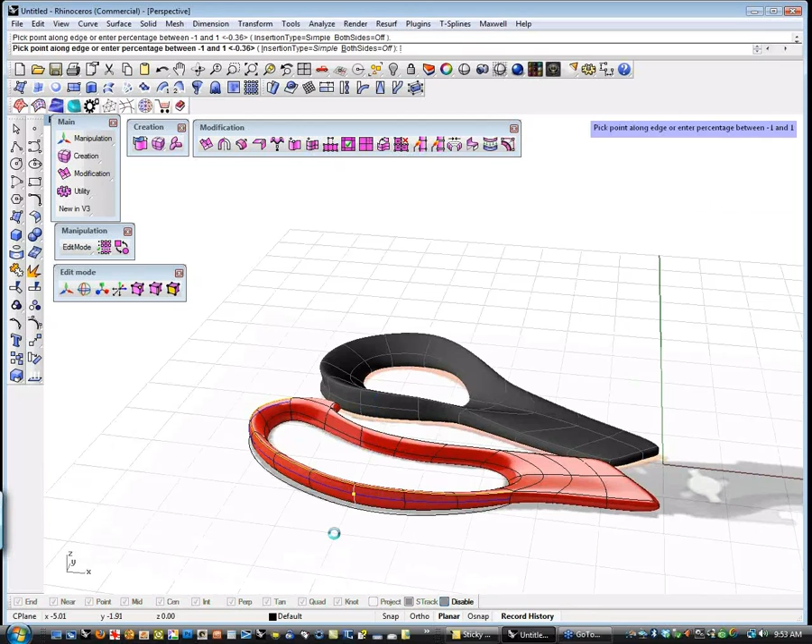I'm going to add one more edge here just because I'm a nerd and I can't stand it.

So Kyle, just while you're touching this up, a couple of questions coming in. One is, can you make an absolutely sharp end where the metal part starts and still have it be the same surface and watertight? So I guess maybe that would be asking, can you get C0 perfectly sharp creases around this edge down here?

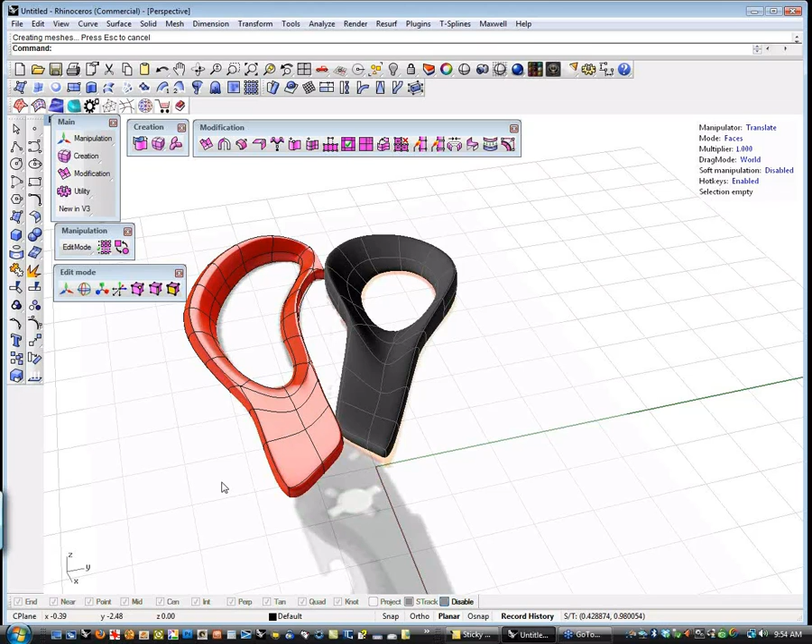Sure. The way that I personally would do that is to pick these two faces and delete them. You'll notice that the end of that thing opens up, and then my workflow would be to pull this past where it needs to be, convert this to a NURB surface, then trim it either with a wire cut or with just a trim curve, and cap it, and then you're going to end up with a watertight poly surface.

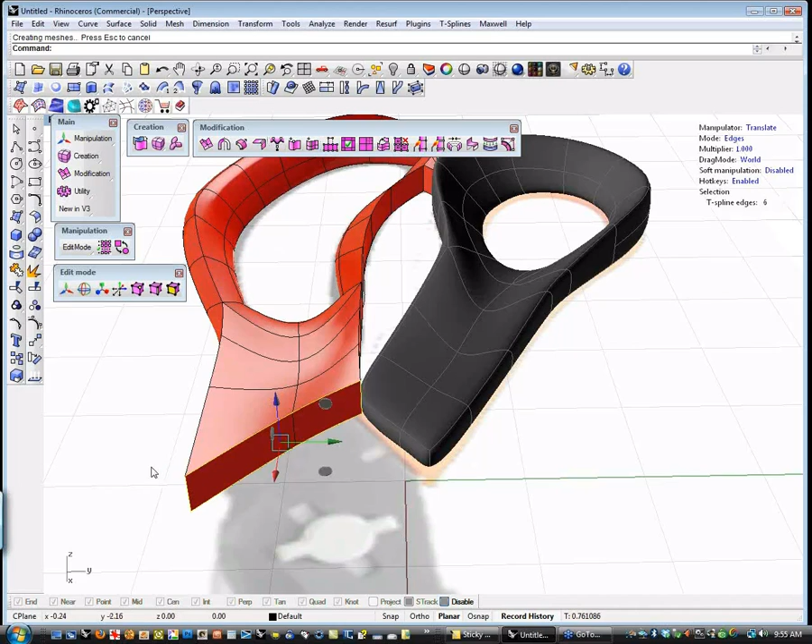But I think what you were asking is, can you crease this edge here? And I believe you can, by picking these edges and throwing a crease on them. Now the problem is that it's going to chase that crease through the model, which may or may not be what you want. So if I crease that, you notice it put a sharp edge on it, but the problem is, since you put a crease on there, it's assuming this is only a 2D resolution down here, and it's shooting that crease through the model.

And the crease needs two full surfaces before it can peter out, and it doesn't have enough room to run here, so it's shooting a crease through the model. So I don't really like that as a solution. The other way you could do it would be to add edges in here to sharpen this up.

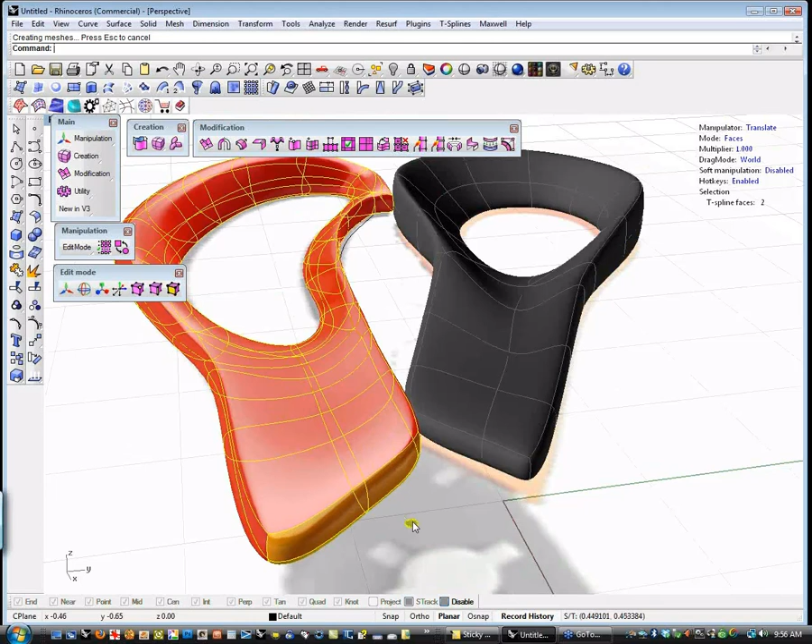Yeah, can you just maybe show the conversion to NURBS? I mean, it's trivial, but I think it's worth showing how easy that is. Yeah, let's do this. And this is where I get up on my soapbox and talk about how easy it is once you have a new tool to say, ooh, I have a new tool, I don't need to remember anything about any of my old tools. Well, don't forget, Rhino's really awesome, and that's the reason you were using it in the first place.

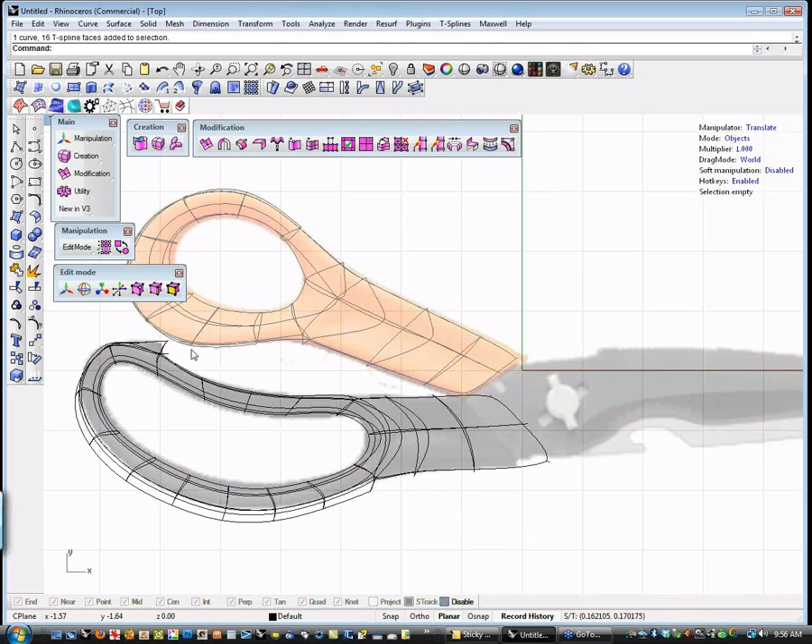So let's put a sharp edge on this. I'm going to go to object mode. I used T-splines to make this organic model, which would have been really hard to make in Rhino, and then I convert it back to NURBS just by hitting the convert button, right-clicking the convert button. I'm going to hide my original T-splines object, and now I've got a watertight polysurface.

Can you show that in shaded mode? Yes.

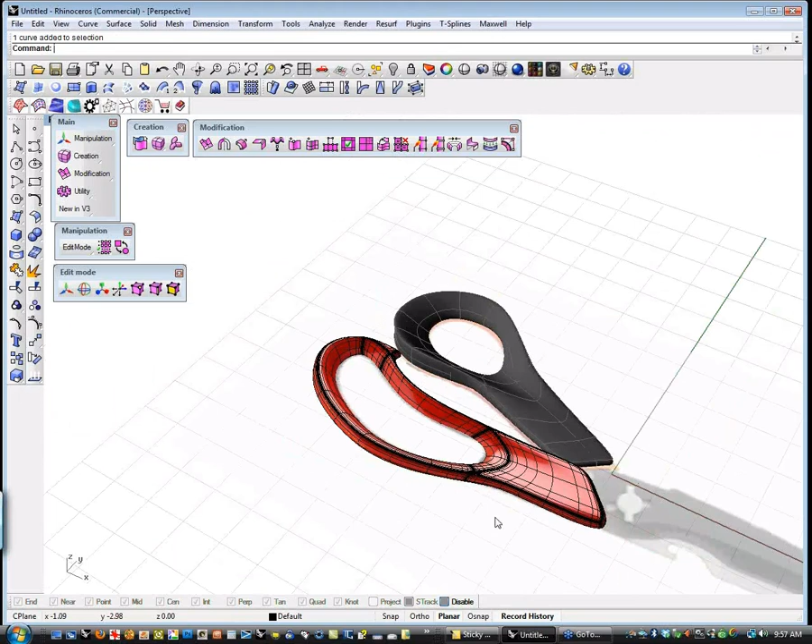So if I go to my top view, now all I need to do is throw a curve through here.

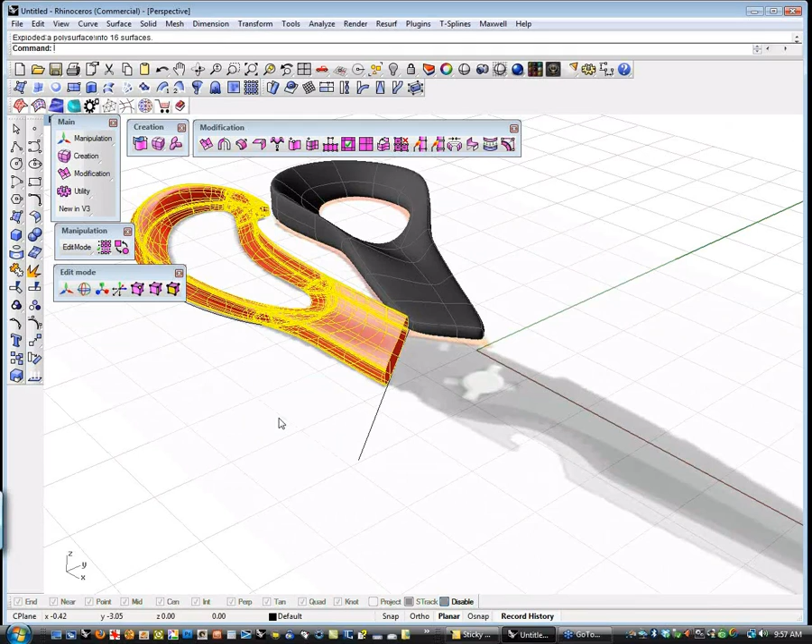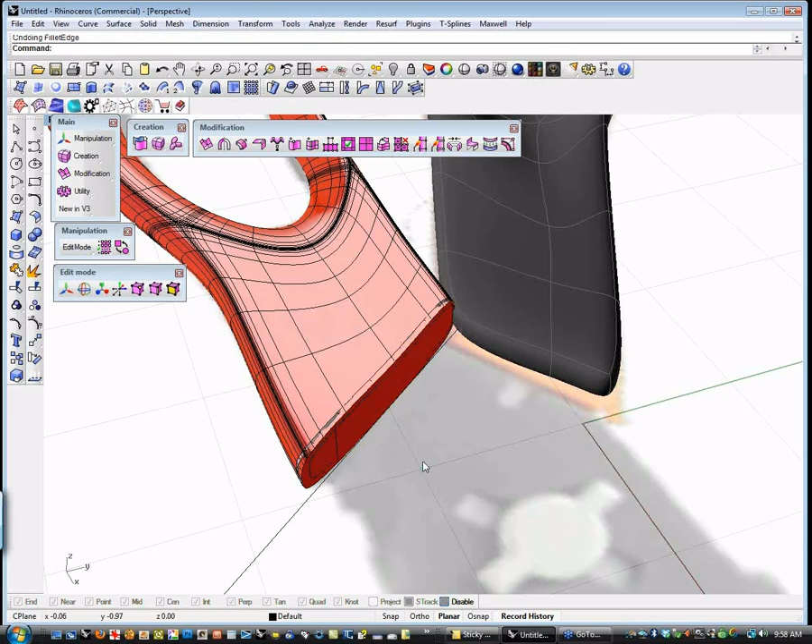I can wire cut it. Flip this. And I've got a nice hard edge. I can also fillet this. One of the nice things about the T-spline's geometry is it's really high quality. And if I throw a fillet on this, that might be a little big, yeah, it's too big for that corner. Still too big, I got a tight radius on that edge. Can't make a bigger fillet in the corner. There we go.

And that is not a geometry issue, that's a display issue with the mesh.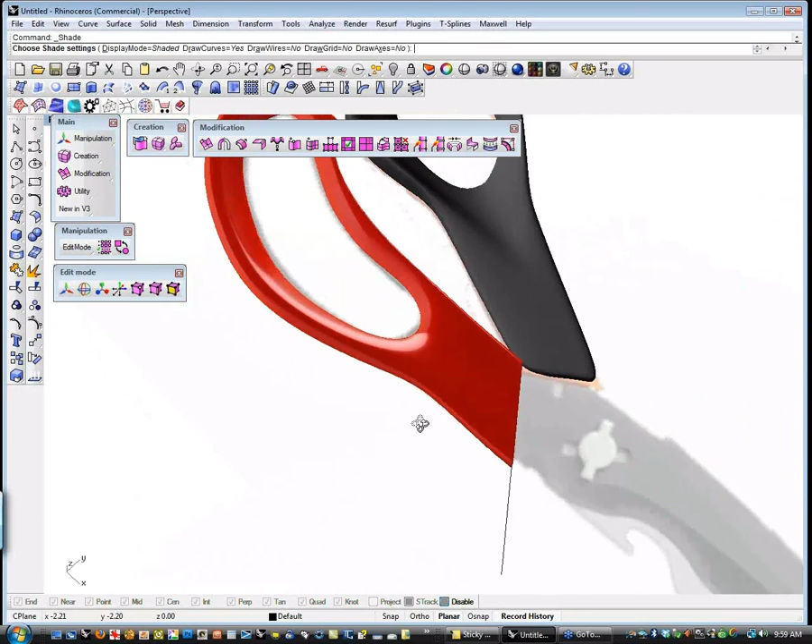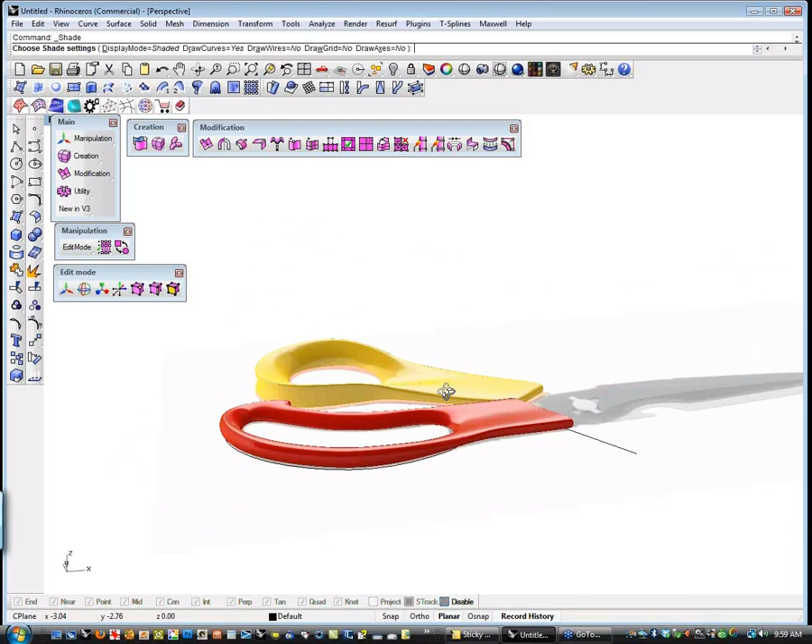Those types of hard details, whether you want to add those in Rhino or bring the T-spline models in IGES into SolidWorks or Pro-E, I think that's exactly where T-spline's interfaces with these other tools, giving you the organic shape and then the nice geometry that you can add those hard features with. I almost always add all of my hard features in Rhino because the Booleans work great on T-spline stuff, fillets work great, intersections, all that kind of stuff works really well because the T-spline's geometry is watertight, so you get the benefit of creating really great organic shapes in T-splines, but you go back and use all the Rhino tools you already know that already work great. So use the right tool for the job.

Don't pound in screws with a hammer. Make sure you're using a screwdriver to put in screws and a hammer to put in nails, and use each tool for what it's best at.

So it's worth noting that once you do turn that T-splines into NURBS, it's kind of a one-way street. You won't want to go back and convert that to T-splines and then edit it, because going to NURBS will add some additional geometry. So you'll always want to save a copy of that T-spline either in the layers or in the file, and then go back to that T-spline and edit that.

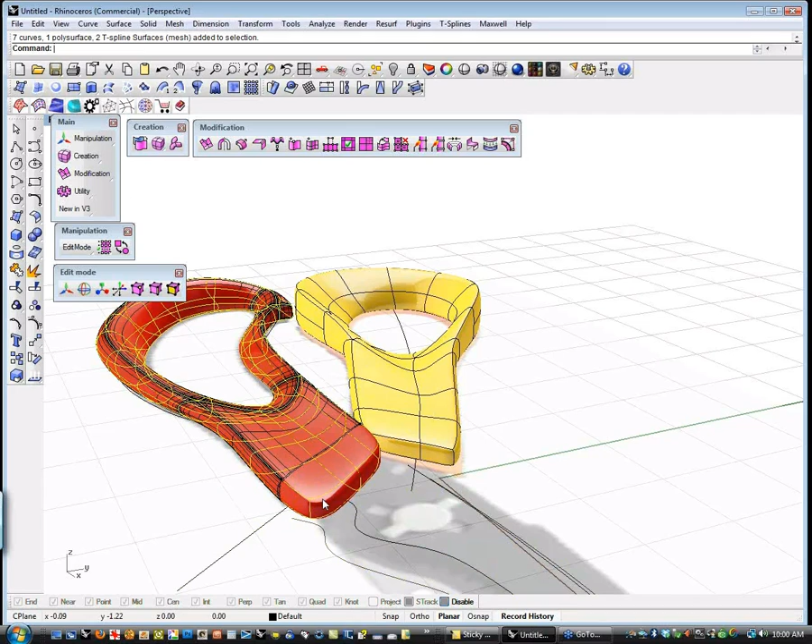In this case, I have the T-spline from the original Rhino conversion, and if I need to edit it, I would obviously keep my trim curves and stuff like that, and edit it and then go back and trim from there.

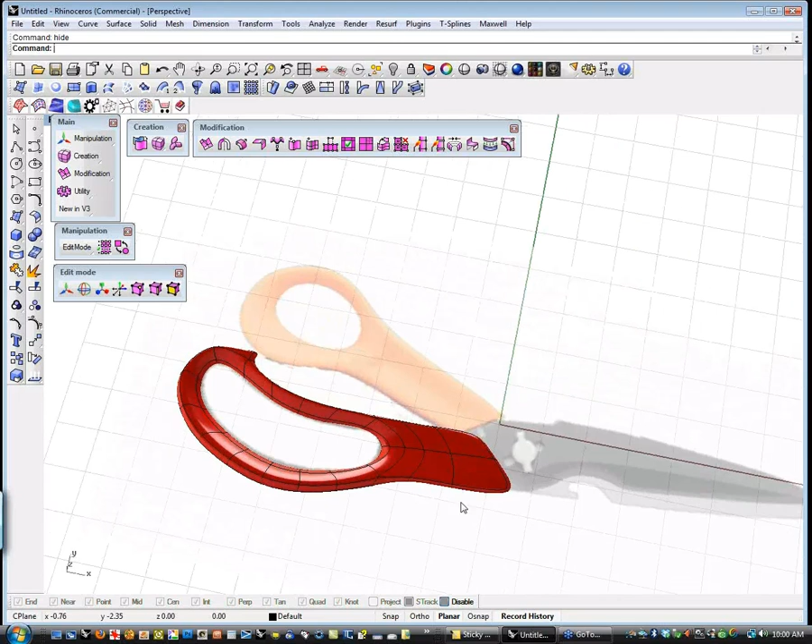So if you're doing an RP part on this, I would RP this, test it, and once you know you've got the right shape and the right fit, then you can go down the line and add all the rest of your details and finish it up.

So here's another question. How about in CAD with respect to mechanical design, if the user wants to specify the dimensions of the objects?

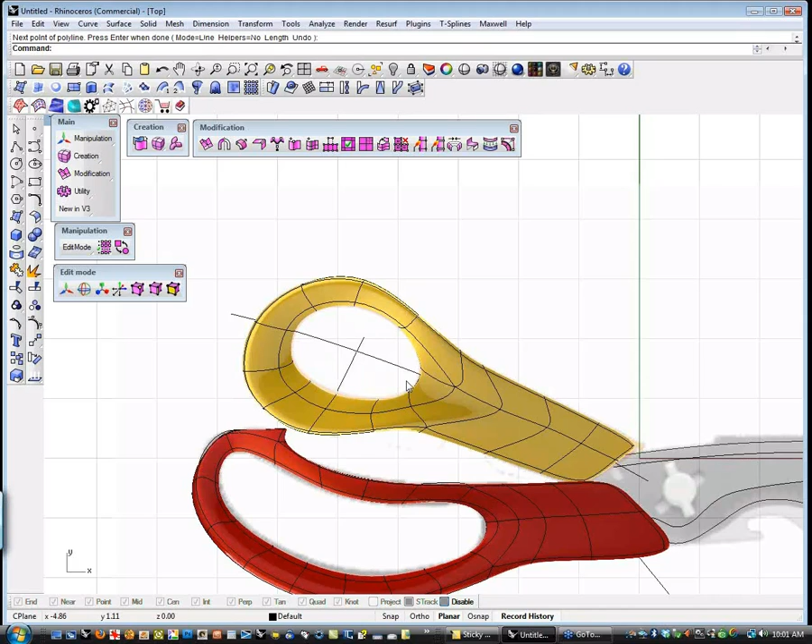Well, that would be a matter of just laying out your original model, and basically you go in and lay it out like you would any other CAD model. If you know you needed 2 inches right here, or an inch and something right here, I'd specify an inch and build around that. So you can build all of your original dimensions and use this workflow here where we're extruding from curves.

But as far as being mathematically precise and saying, okay, I need an 80 thousandths radius or something here, that's not how T-Spline works. So if you need that kind of stuff, what I would do is build the model with, quite honestly, creases in it, and then go back and do your fillets in SolidWorks or Rhino or something like that. But I found out that in most cases, if you're doing something that needs to be organic in the first place, having a mathematical fillet running through it typically is not the design intent.

Yeah, and I guess the other point to add is, if you have your T-Spline organic part and then need to transition that into some more exact dimension parts, there are a few ways to do that. We have a T-Spline's match command that you can use. You can also use the Rhino blend commands. You can blend off of a T-Spline's edge into some other geometry as well.

And there's an example of that in the tutorials on the webpage, I think it was, I can't remember which one it was. It was either the helicopter. No, it was the tips and tricks webinar. There's an example of using the Rhino blend surf to go to a T-Spline's object without destroying the NURBS. So we can send out a link to that.

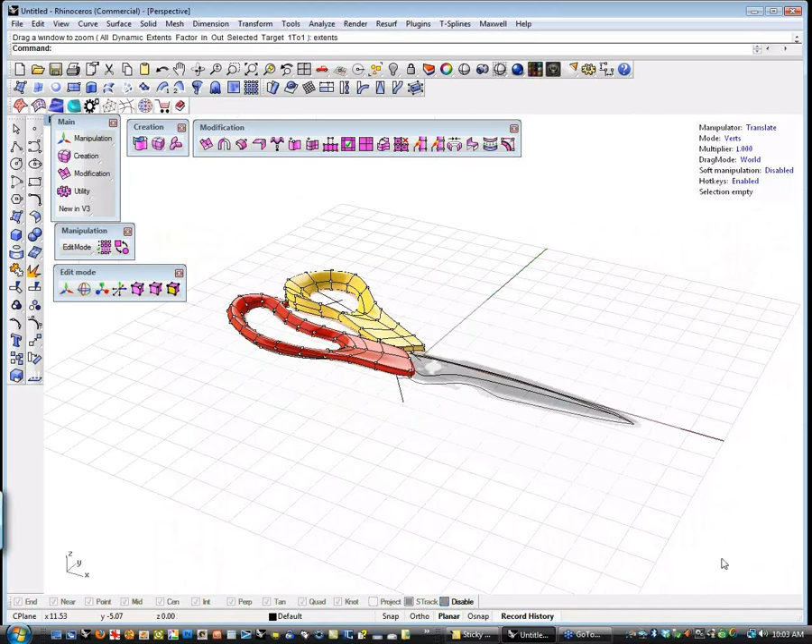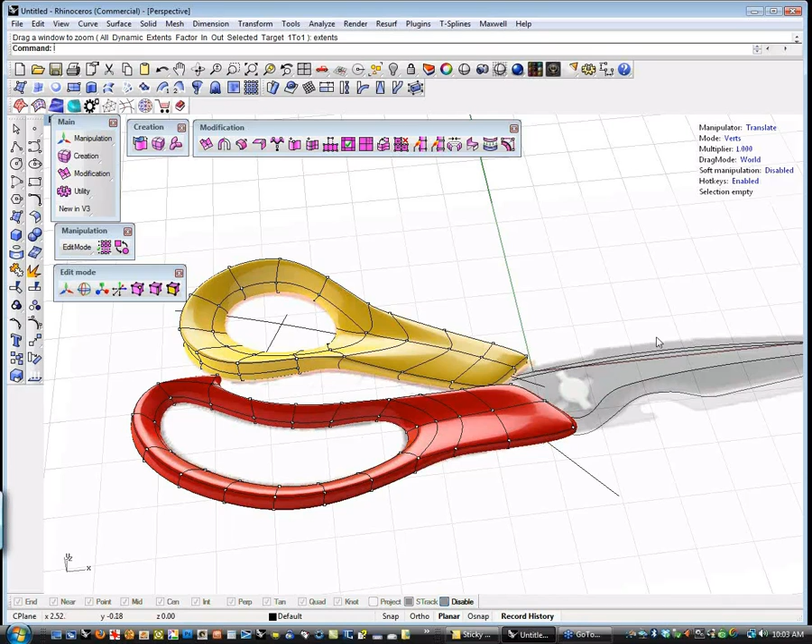If you were to build the blades, you could use the Rhino loft command to make these hard edges, most likely using Rhino edge commands instead of T-Splines, and then use T-Splines for the organic stuff. Use Rhino to enjoy the benefits of traditional NURBS modeling, and let the two live together in the same space—you end up with something better than using just one or the other.

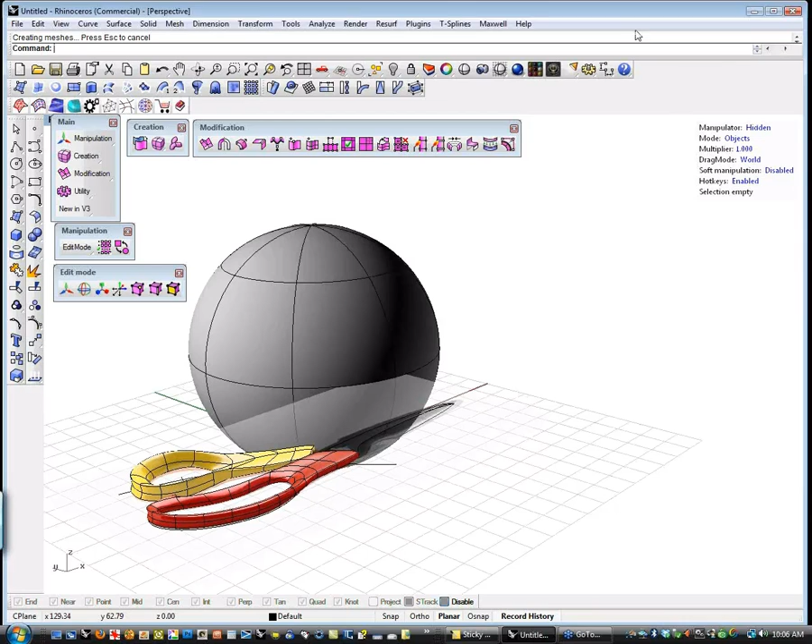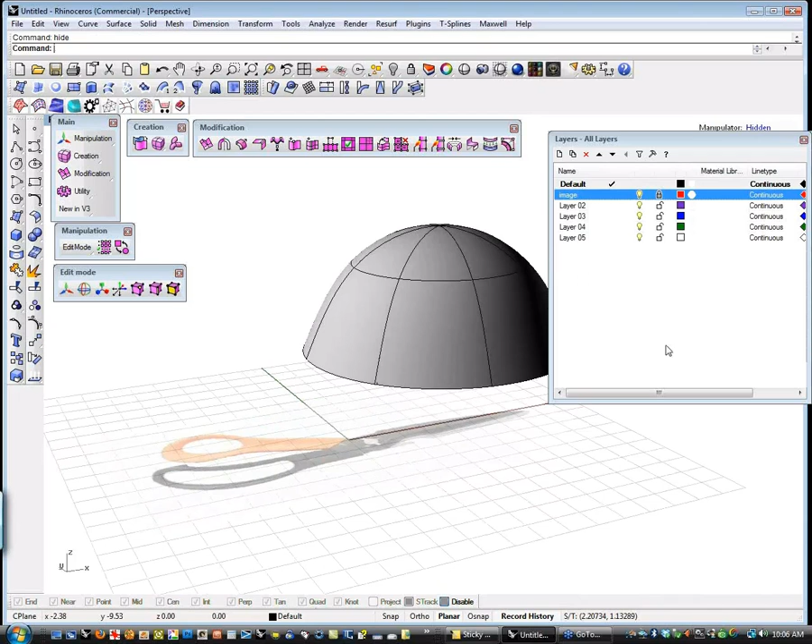Let me pick this and get rid of these faces, and this—hide everything else. Let me get rid of this bitmap so it's not distracting. Alright, I'm going to copy paste this and scale it a little bit. So now I've got two surfaces, right?

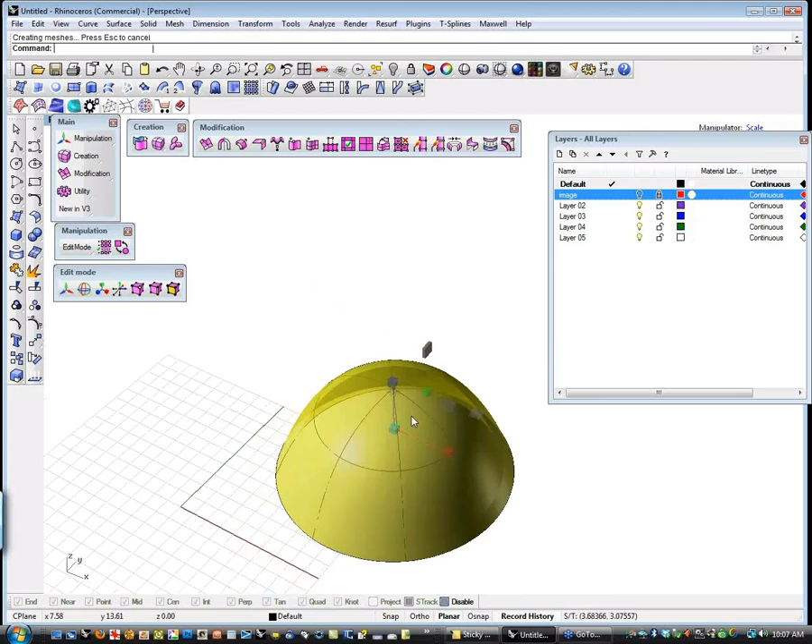I'm going to subdivide both of these so I've got more geometry. Make sure I've got everything. That got a little nasty up there—spheres are weird because they have that degenerate point on top. I'll subdivide exact, and that way it's got it.

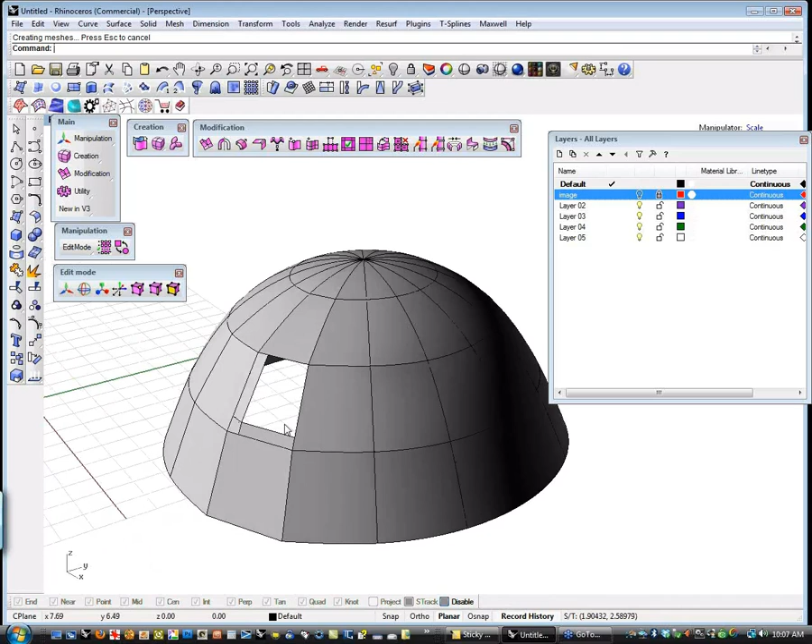I'm going to pick these two faces and use the bridge tool, which is here. If I click that, you'll notice I've pre-selected them. I want to make sure my corners match and my arrows match so I know I'm going in the right direction. I bridge between those—typically when you bridge edge to edge, it closes the volume, whereas if you go face to face on the inside, it actually makes a hole through the model.

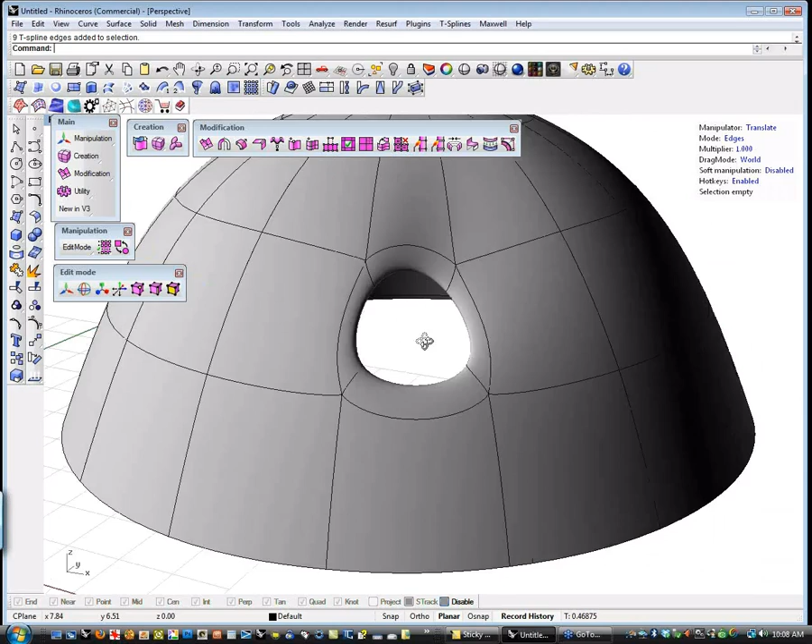Once the hole's through the model, let me get rid of this—then you have edges just like with anything else, and you can manipulate the shape of this hole. That's how you would do it. If you needed a specific shaped hole, you could use the match command and loft into that, or use Rhino's blend curve or blend surface. But that's the typical workflow for making holes and stuff.